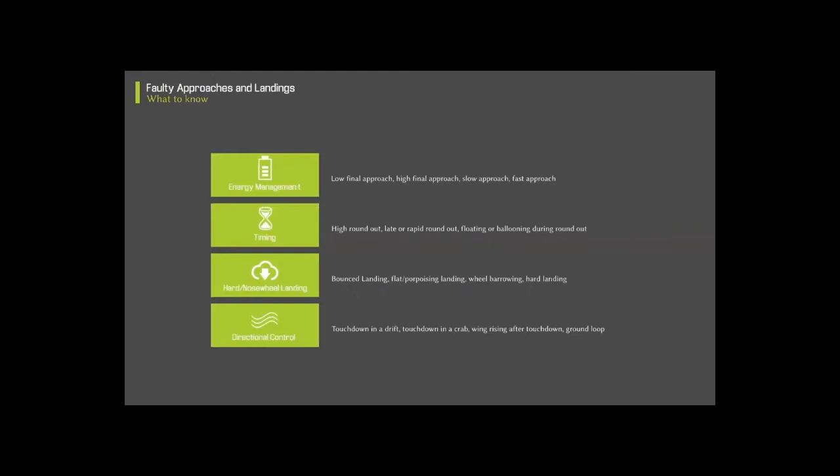The timing issues, of course, we can see high round outs, low or late/rapid round outs, floating and or ballooning during a round out. In the hard landing and nosewheel section, we've got bounce landings.

We've got issues with landing flat that can lead possibly to a porpoising landing. We also have some possibilities with wheelbarrowing, and just generally what a hard landing concern has in relationship to us, specifically when it comes to the condition of the airplane.

Directional control issues, touchdown in a drift. This usually occurs with a crosswind, though it doesn't have to. We sometimes accidentally begin to drift due to our aileron control inputs while attempting to round the airplane out or flare it into a touchdown attitude. We also have issues with touching down in a crab, where the alignment of the airplane is not correlated with the runway, so the airplane is misaligned when we touch down.

Other crosswind concerns: wing rising after touchdown. And if we have time, we'll discuss the ground loop shortly, though we won't spend too much time on it other than discussing what it is, as ground loops aren't too common in tricycle landing gear airplanes. For any of you flying tail dragger or conventional gear airplanes, as opposed to tricycle, ground loops become a bit more of a concern.

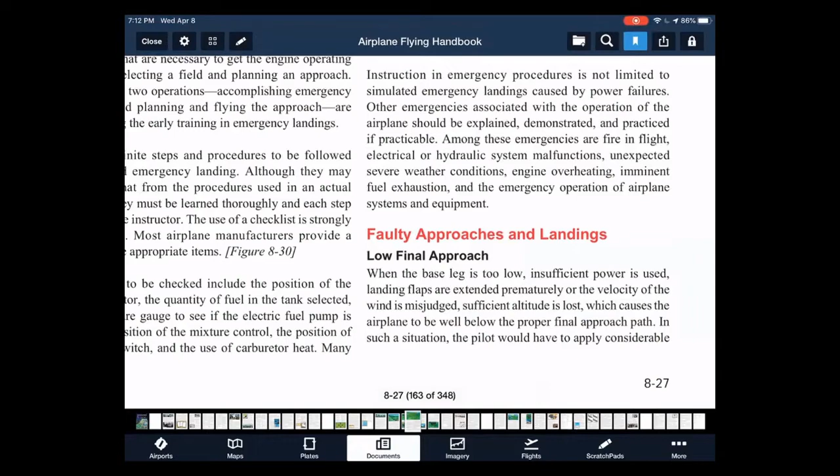So starting off in faulty approaches and landings, in this case, low final approach. If you're unfamiliar, this is the Airplane Flying Handbook, it looks like this. You can find this if you use ForeFlight, you can download it directly. And specifically, if you wanted to find where we're looking today, head to the table of contents. Let's jump to the table of contents real quick. We're looking in Chapter 8 right now, approaches and landings, specifically 8-27. So we'll jump ahead to 8-27.

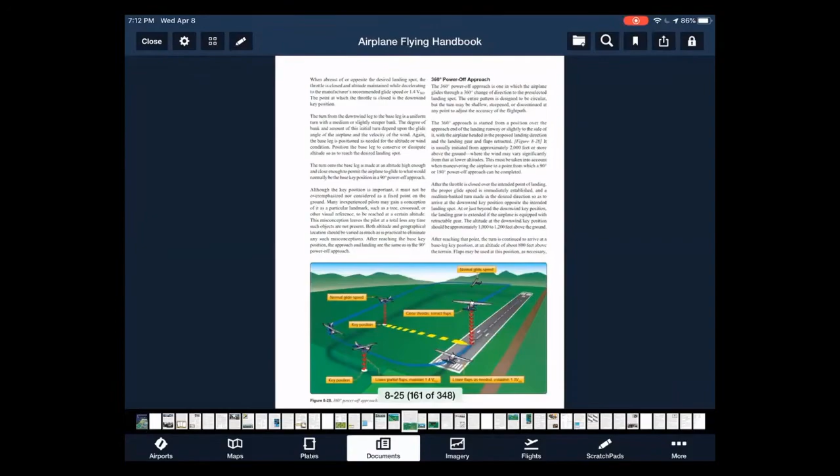And we're talking about a low final approach. Now, we're not going to read this together specifically; this is where you'd find the information, but let's just touch base on a couple of things that can complicate our approach and lead to a low final. One of the most common things I see, specifically on progress checks, that lead to low final approaches is a lack of awareness of where the winds are. Namely, usually the winds are fighting us on a base leg position, and in combination with that, usually the downwind was too wide in the first place.

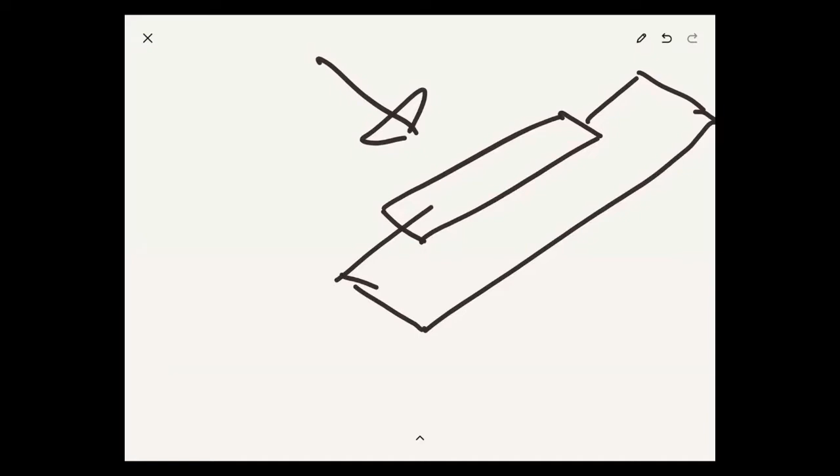So let me draw something out just to clarify or visualize what I'm saying here. Imagine this is our runway, this is kind of a semi-3D drawing here. So there's the departure leg, the crosswind, the downwind leg, the base, and the final. The problem is today the winds are blowing out of this direction. We probably in this case are not mindful of that if we're allowing ourselves to get wide on the downwind. So there's our first problem: maybe we turn crosswind too late to downwind, or we didn't apply proper wind correction angle on the downwind.

These two combining factors lead to a longer base leg to fly, and on top of that, our base leg ground speed is going to be slower. So what does that mean to us? It means that if we use the same configuration we always do, our descent angle is going to be steeper, and we're going to end up lower on this approach.

This is one of the main reasons I constantly see low approach angles, specifically on progress checks: a lack of awareness of the wind. And in reality, the wind is never the same, today is not the same as tomorrow. The more mindful you are of the wind, asking yourself where's the wind and how is it going to affect me, and what do I need to do preemptively to correct for this wind so I don't end up getting into these situations.

So low final approach is really what we're talking about. This is one of the ways to avoid being low on approach.

Another complicating factor lately is having to extend our downwind. If we take the standard operating procedures given to us by the school and apply them at various distances from the runway, sticking hard and fast to those numbers, it's not always going to work out. We have to be willing to adapt and say, this is going to be a much longer flight path than my normal position from desired touchdown point to touchdown itself. So I may start with these numbers, but I'm expecting to have to modify from them.

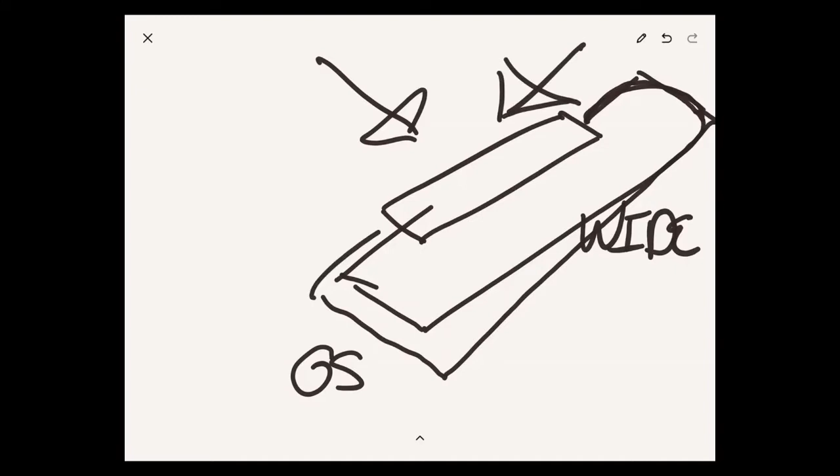This can be further complicated by different situations, like if the wind is down the runway as we hope, you may expect to be on glide on the base, but when you turn final, you suddenly turn into the wind and your ground speed slows, and so your descent angle steepens, i.e. we get low on final approach.

Whatever the different reasons, and there are more than what I've just discussed, we end up being low on final approach. Most people can recognize this, so I won't go too much into detail on how to recognize it. The key takeaway is at what point have we determined that this is unsatisfactory as far as being a stabilized approach, and need to abort the approach and go around and try again.

We know from the standard operating procedures that it's 300 feet AGL, but that doesn't necessarily mean you have to wait till 300 feet AGL to go around. Let's acknowledge that the go around is always an option, and in fact should be your first option unless you meet whatever desired satisfactory elements you need. Your mindset should be go around, go around, go around, unless at 300 feet I have A through G level parameters - you're on speed, you're on glide, you're aligned with the runway with minimal correction needed. Otherwise, it's a go around.

So we're low on final approach. The one thing I want to emphasize, because we could discuss this for hours, is an excessive commitment that I also see when people are low on final approach.

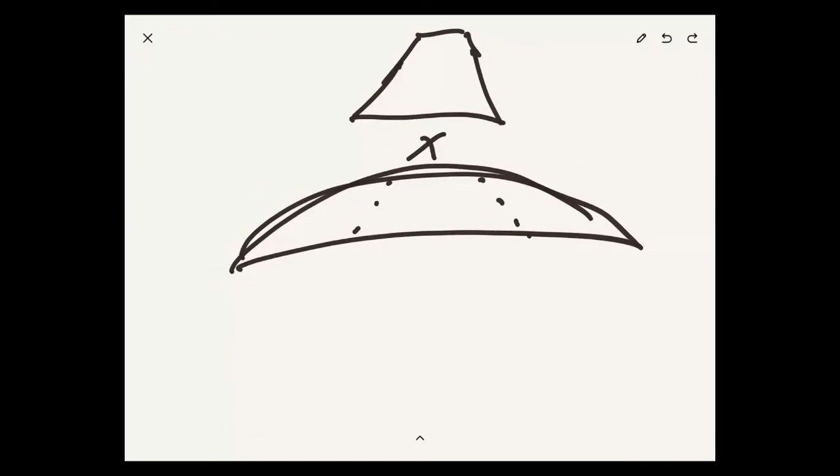Let's draw this out. Most people recognize they're getting low on final approach. Just a quick illustration to visualize what we're talking about. Most people can recognize that as they look out the window, down their sight picture, using hopefully their aim point. Let's say they pick their aim point wherever it is - maybe on a very short runway, our aim point is actually in the grass because our touchdown point is going to be here. So we're looking at our aim point, and we recognize we're getting low on approach because we see the aim point moving vertically higher in our windscreen.

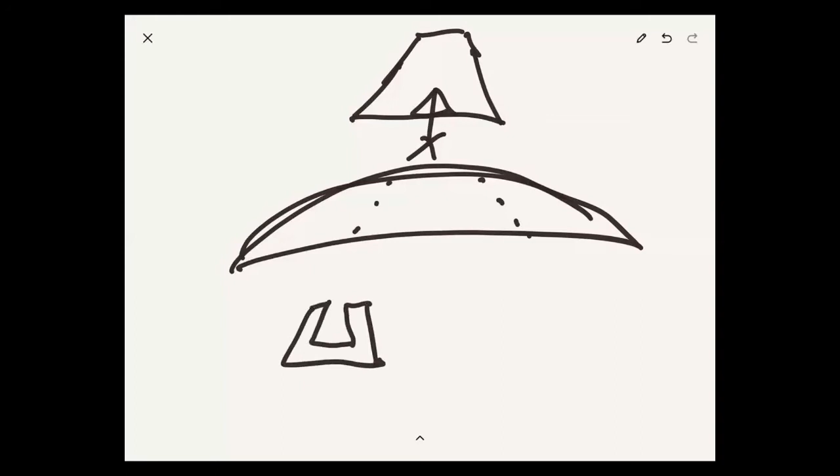Most people recognize that, and the corrective action, of course, is to add power. The problem is people recognize this, but more habitually than cognitively. What do I mean by that? I mean they react to it without recognizing they're reacting to it. Instead of the power being adjusted, it's usually the pitch that's being adjusted instead. So without even recognizing it, they're beginning to apply back pressure.

This can be further complicated by the fact that maybe there's buildings or trees that are moving higher in our peripheral, and therefore we don't like that, right? When we're flying, we don't want to see things on the ground close to us when they're not supposed to be close to us. And so those things further aggravate this habitual response to pull back on the flight controls, rather than the appropriate correction, which is to add power.

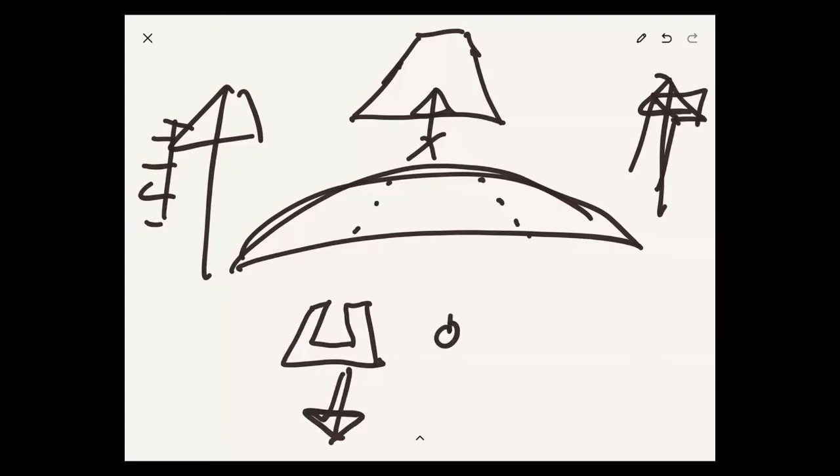Now, at a certain point, you get too slow, you have to abandon the approach. Generally that tolerance, if we think about the ACS, if we're talking about a normal approach, would be somewhere around 5 knots. It depends on the exact approach airspeed you're using. But if we're just talking about a normal approach and landing, thinking about 5 knots should really be your tolerance before you say, oh, this is a go-around.

However, even slowing down 5 knots further complicates this situation, because if we go back to aerodynamics, remember what have we really done by pulling back on the flight controls? We've increased our angle of attack. And by increasing angle of attack, yes, we produced some more lift, but what we've really done is increase the induced drag on the airplane.

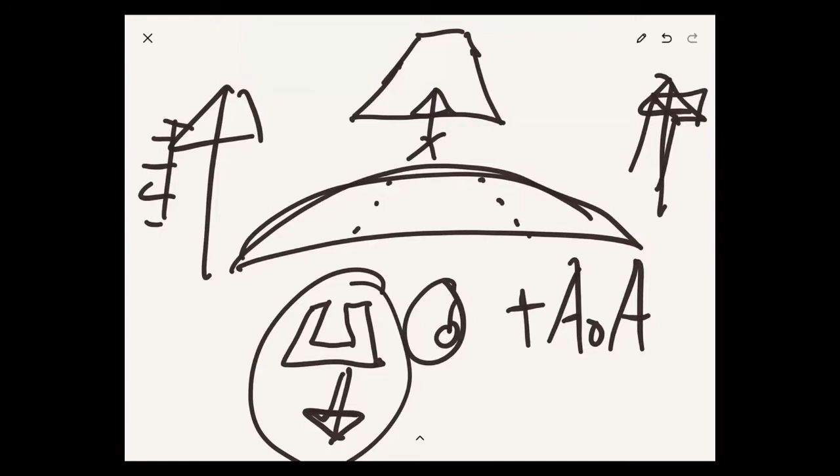So the very thing you're trying to avoid, not getting low on approach, is in fact the very thing that's going to ensure you get low on approach, because the increased drag will increase your descent angle. And so the power you needed just a moment ago to correct and arrest the descent angle and stay on the desired descent angle, not only do you need to increase it to that amount, you're going to have to further increase it to compensate for that increased induced drag.

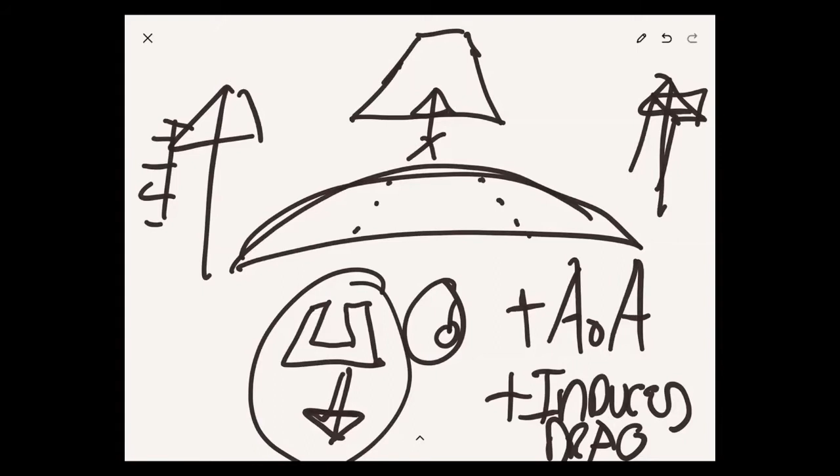So what's the takeaway from this? You've got to be cognitive of this and say to yourself, I know that, like most human beings, my habitual response is going to pull back. But instead, constantly ask yourself, is my aim point moving higher on my windscreen? If it is, and I'm on speed, then the corrective action should be to immediately correct with power.

All right, so let's talk about the secondary complication with this. Most people, if they do add power, or if we're talking about being high on final approach, will reduce power. But bear in mind that correction is just that - it's an initial correction, not your ultimate and final correction. And if you've ever asked yourself why we keep our hands on our power, it's not just because it looks cool, because that's the official pilot body position. There, of course, is a rhyme and reason behind that.

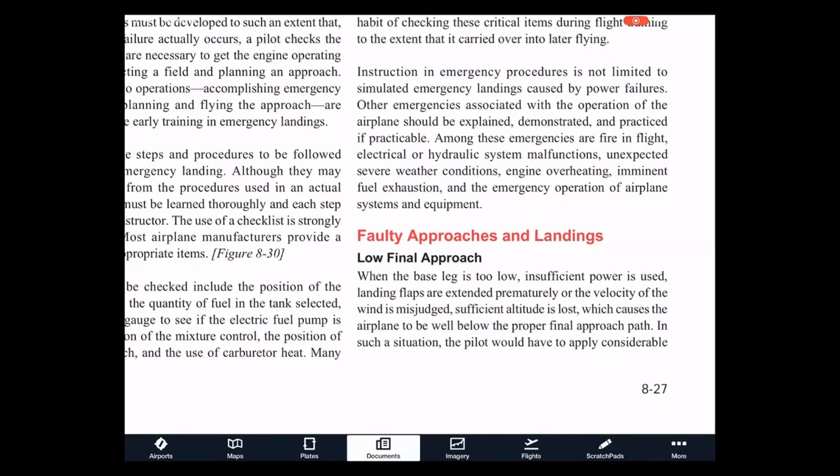Namely, in this case, we really want to think about power as much of a correction tool as the flight control itself. So we add power in association, but at the same time, we don't expect to leave the power where it is.

Here's what I also see. I see on progress checks, when someone recognizes they're getting low, they add power - good. But they don't recorrect, and that's the key takeaway. One power setting isn't the final power setting. Think about adjusting your power in and out almost as much as you would move the flight controls themselves with both aileron and elevator control inputs.

You're not committed to one power setting. You add a power setting, expecting in this case that it's going to allow you to rejoin the desired glide angle, and then you expect in association, you're going to have to reduce the power again.

If you commit to a single power setting, you'll probably fly through your desired glide angle and then find yourself on a high approach as opposed to a low approach.

So, key takeaways: think about adjusting the power continuously as necessary. In fact, if you're first learning how to land, or first learning how to make an approach, don't feel like you've got to get it right. Allow yourself to experiment, because what happens a lot of times is you're so concerned about finding that right power setting that you'll set a power setting and that's it.

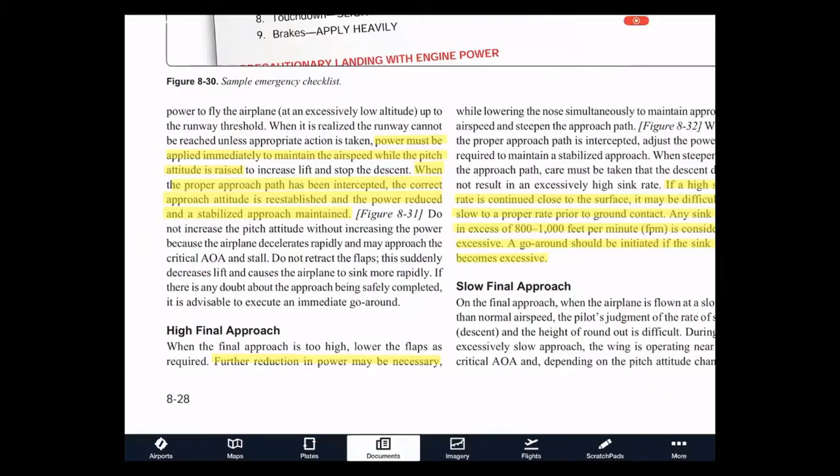And the next thing I want to talk about is high final approaches. We're not going to spend as much time as low because this is the same exact concept, but now in reverse. This is another common issue I see on progress checks: someone recognizes that they're high. In contrast to what we just discussed, now someone recognizes the aim point is moving lower in their windscreen as they're on speed, and so in association, they will reduce power.

Again, don't feel committed to that power reduction. In fact, expect to reapply the power. We even see this in the Airplane Flying Handbook. So if I jump back to the Airplane Flying Handbook, you're also going to see that they give us a specific visualization.

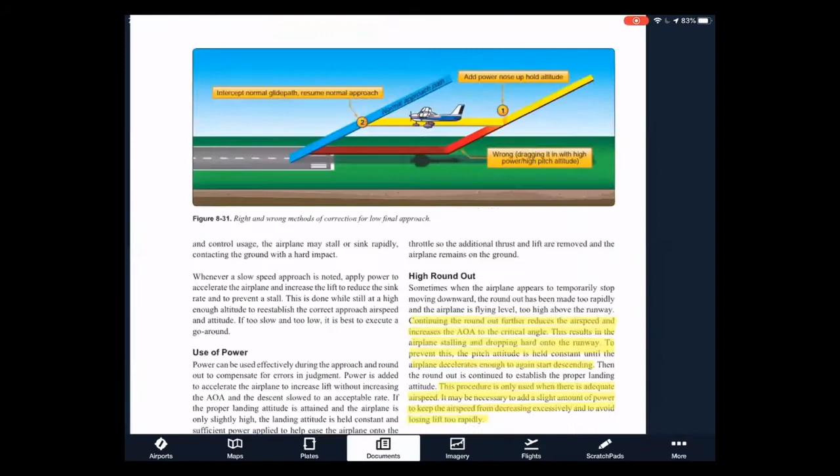In this case, to show that we are going to reduce power, rejoin the desired glide angle. I'm sorry, excuse me, this one's an addition of power to rejoin the desired glide angle, and reduce the power.

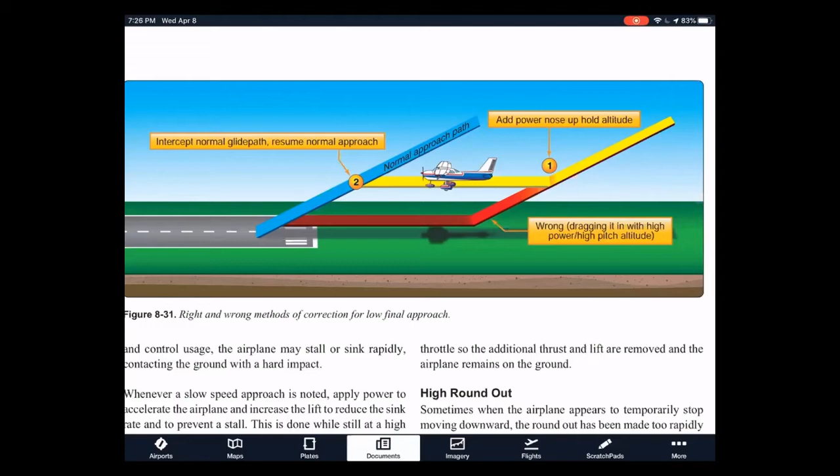There's no difference when you're high. If you're high, you've got to reduce the power to rejoin the desired glide angle, but don't expect that power reduction will be sufficient. In this case, the power reduction, if you leave it where it's at, is going to actually descend through the desired glide angle as opposed to keeping you on glide angle. So once again, don't feel like the power setting is a singular commitment. Be ready to readjust the power after making that initial adjustment.

Okay, before we go on, I want to talk about one key takeaway. Once again, with final approaches, guess what, the go-around is always an option. But one thing you need to be aware of, of course, is what's considered a stabilized approach. So if you're high on final and you reduce the power and suddenly you recognize that from your current descent you can make your aim point with the power reduction...

Sorry, everybody. Vivian had to make her appearance.

Whether or not that is stabilized really depends on whether it's an excessive sink rate. If a high sink rate is continued close to the surface, it may be difficult to slow to a proper rate prior to contact with the ground. Any sink rate, according to the FAA, in excess of 800 to 1,000 feet per minute is considered excessive. Now, does that mean you need to look at the vertical speed indicator to determine whether you're at an excessive descent rate and therefore on a destabilized approach? I'm not going to say yes or no to that. What I would say is with experience, you will develop a kind of sixth sense as to whether it's appropriate or not, because if you've done enough correct approaches with input from your instructor, from discussions with your instructor or other people, you will develop a sense for that.

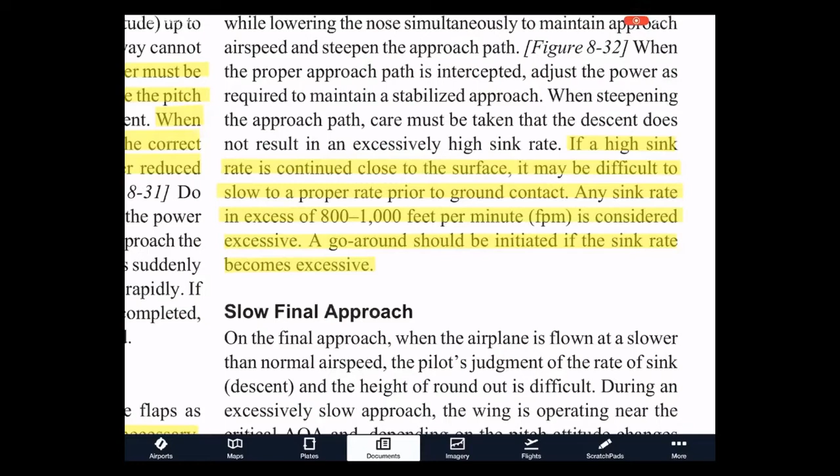The next thing I want to talk about is the slow final approach. This on its own usually isn't common. In other words, usually you're not slow and on glide. Usually the slow final approach is a result of a low final approach.

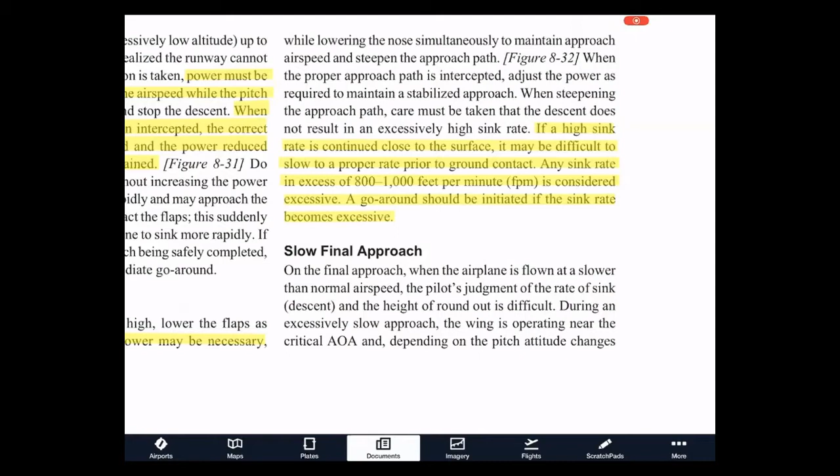It's exactly the same reasoning we just talked about when we're low on final approach, in a situation where we're raising the pitch habitually in response to the runway being higher and higher, or specifically our aim point moving higher and higher in our point of view. So the habitual response is to raise the pitch before adding power. That increases our induced drag, and that's what's going to slow us down. So usually, a slow final approach is correlated with a low final approach.

The complicating factor in this situation is, even if you can rejoin the desired glide angle, which is questionable whether you'll be able to do, and by the way, we're well below 300 feet, so we should have gone around by now in this visualization. But the idea is, if we're dragging the airplane in, the airplane's energy is entirely dependent on the power.

What do I mean by that? It means that at any point in time if you reduce the power, the airplane's response will be to sink rapidly towards the ground, or in other words, descend quickly through our desired descent angle.

So what you end up having to do is carry power long into the approach, as opposed to if you're on glide or even slightly above glide, which allows you more altitude to reduce the power earlier in the approach. In this type of situation, if you drag it in, you have to carry power pretty much right into the round out.

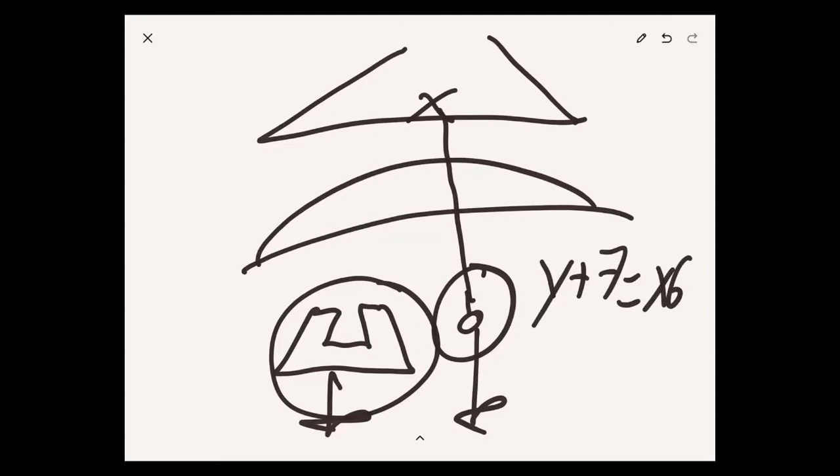If you're carrying power late into the equation, it's kind of like solving a two-variable equation. Obviously, I didn't give you enough information there, but the idea is this is your flight control, this is your power. If you compare that to a single equation, well, obviously that's a lot easier.

So what am I getting at here? I'm getting at that if you leave power late into the round out, or late into the approach, or even worse, into the flare, and you suddenly reduce the power, it's much more difficult to adjust on the flight controls in response to that.

That's the complicating factor, among many other things, that a low and slow final approach complicates. But specifically, one of the things I often see is the low, slow final approach requires someone to carry power late into the approach, and when they reduce the power, it's very difficult to manage the round out and the flare. It takes more deftness of control, and ultimately more experience to develop that ability.

So why even test that? Just use a normal approach, make things easier for yourself. The key takeaway with the slow final approach is the very difficulty of lowering the pitch.

You must reduce the angle of attack, because not only in a slow final approach do we have the complication of getting lower, since we increase the induced drag on the airplane, but as we can see in the Airplane Flying Handbook, the wing is operating near the critical angle of attack. So obviously we have a concern in relation to stalls.

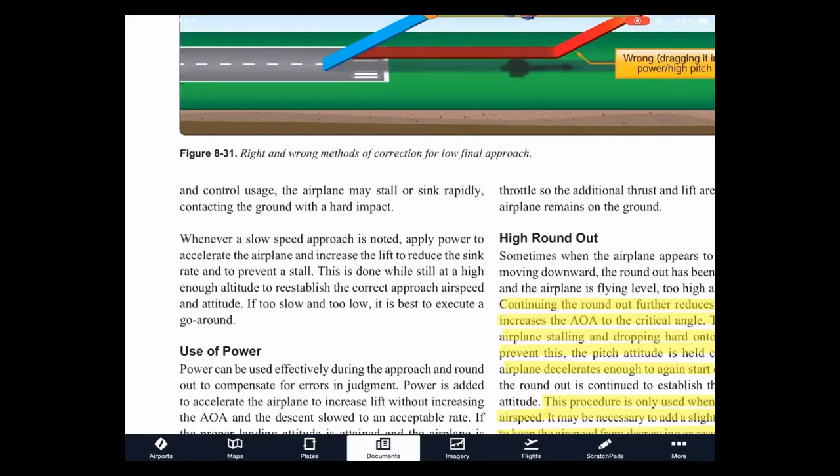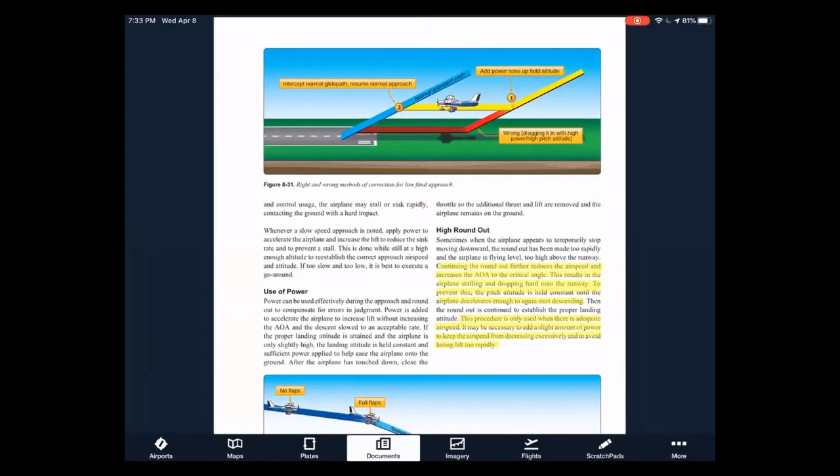All right, so let's jump ahead to our next section. We're moving past energy management into round outs. Specifically, though, let's talk about them before I present them all together.

Ultimately what we're talking about here is timing issues. In this case, timing and sight picture are key for proper timing. But as I often try to emphasize, it's a mental procedure - in other words, when are you going to look, where, when are you normally reducing the power, and then ultimately touch. Touch, admittedly, does come with practice, but it also comes with proper procedure.

As everyone who flies with us knows, we should have the airplane properly trimmed - namely, as the SOP states, at least 2 to 3 wheels of trim, so that the flight control is light in your hand. You can't have good touch on the flight controls if you're constantly fighting the airplane. So a relaxed grip is really key in this consideration.

By utilizing some of those procedures we'll discuss specifically, for most people we eventually get the approaches down. We can recognize when we've destabilized the approach and we just go around - that's a solution. But now we're getting closer to the ground, things get a little more complicated, requiring a bit more deftness of control. There's less standard operating procedure for it, because when you're close to the ground, it's more of a feel than a procedure. That's not entirely true across the board, as we'll discuss, but touch is a key element.

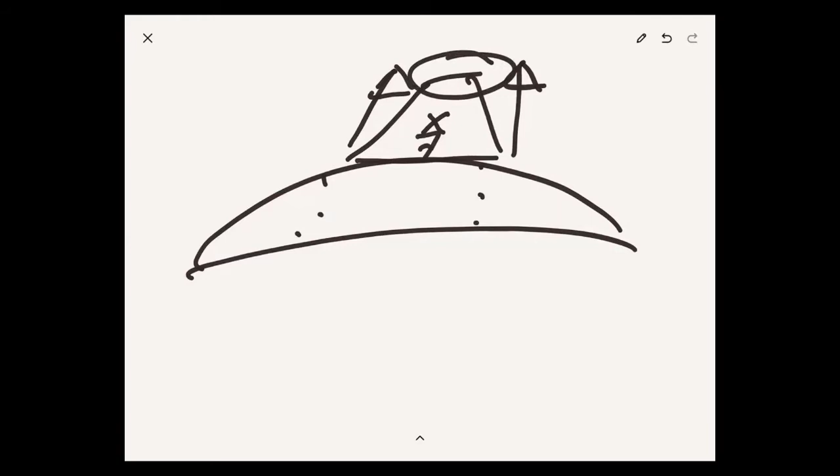This is the complication that leads to a high round out, where we stare in over our nose still at our aim point, or our touchdown point beyond it. So when do we reduce our scan at the aim point and move it toward the end of the runway for proper depth? It's when you begin to reduce the power, and you reduce the power when you recognize the aim point is made. So you're done with the aim point at that point. You begin to close the throttle back, recognize you have the aim point made, and your eyes are drawn out towards the end of the runway, which begins to give you depth perception as you move closer.

Don't forget also, secondarily, another way to interpret your depth is that as you move closer, the runway itself begins to envelop your peripheral. So you're looking out there, but in your periphery you can still see the runway moving sideways around you as you get lower to the ground. Those are your two key takeaways: scan towards the end of the runway for proper depth, but also use your peripheral vision to recognize when the runway envelops your peripheral, at least the width of the nose—that's the time to begin the round out.

If all the while you've been staring at your aim point instead, it's going to fool you into thinking you're closer to the runway than you actually are. This is usually the most common culprit for why a high round out occurs.

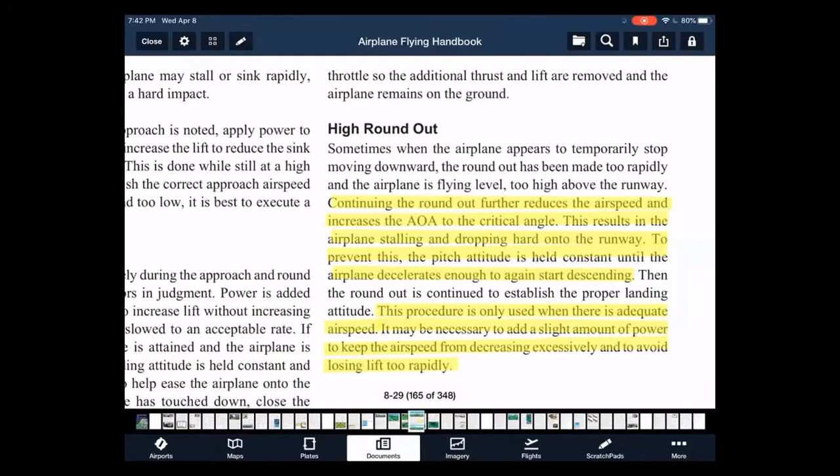And early on when you're first learning landings, there's not a lot of room for judgment. So it's best that you first consider the go-around. Again, that's our first option. And avoid, of course, a stall too high above the runway.

Once again, the book says it is recommended that a go-around be executed anytime it appears the nose must be lowered significantly or that the landing is in any other way uncertain. So your go-around, as you can see, is always your first option. And guess what? It's going to be the first option for all of these complications.

All right, we've got some polls in here. Nobody fell for my last answer there. So yes, it looks like a few people are still concerned about the difference between the round out and the flare, understanding the difference between the round out and the flare. And the second element would be the confusion between the whole aim point and touchdown point thing. So we are definitely going to address both of those. And I think actually this is a good time to do it.

So let's stop for a moment. I'm actually going to open it up for questions after I kind of delve into this, and then we'll move on. So before we do, let me draw out a couple of things.

Okay, the first thing is, what in the world is the difference between the round out compared to the flare. Because a lot of people say the round out and the flare, right? And yes, if it's done properly, they do move fluidly together where one just transitions smoothly into the other, where you almost, as an observer, couldn't tell the difference. But for those who are first learning, you do really want to separate them.

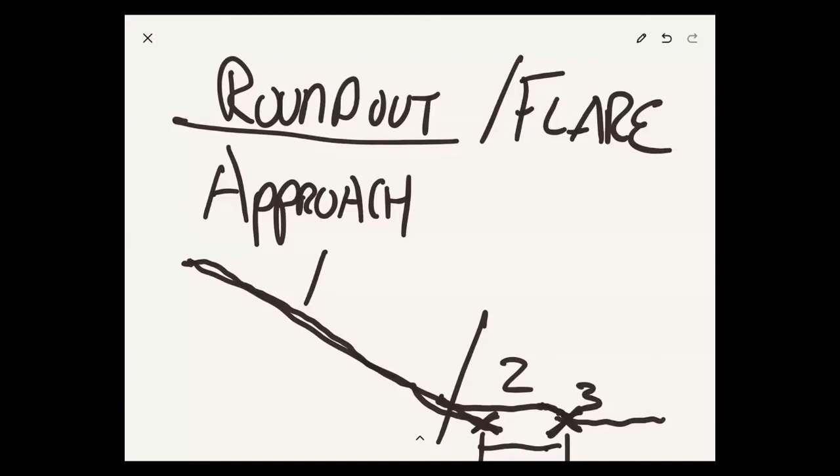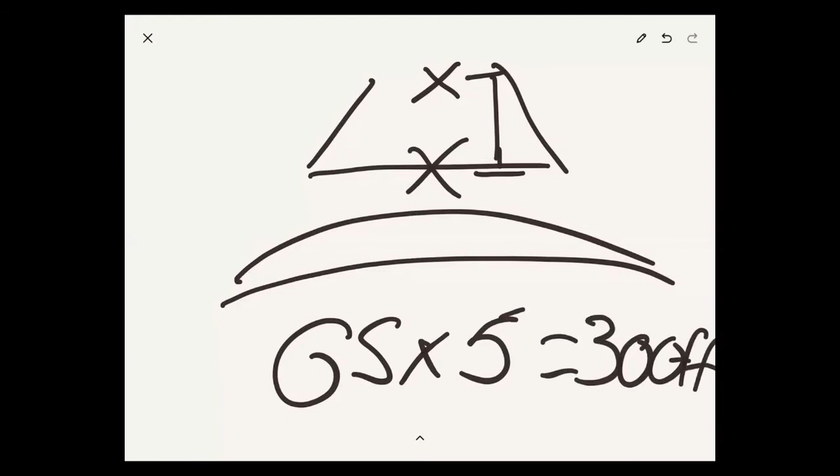So what that looks like to us out the window: if I want to land here, I can't aim there. In other words, that point should not stay affixed in my windshield—I have to aim somewhere short of it. The difference between the two depends on the airplane and configuration you're flying. But if you're flying a Cessna 172 with full flaps at normal approach airspeed, the rule of thumb is generally ground speed times 5 in feet. So if your ground speed is 60, it's approximately 300 feet difference between where you should aim and where you should touch down.

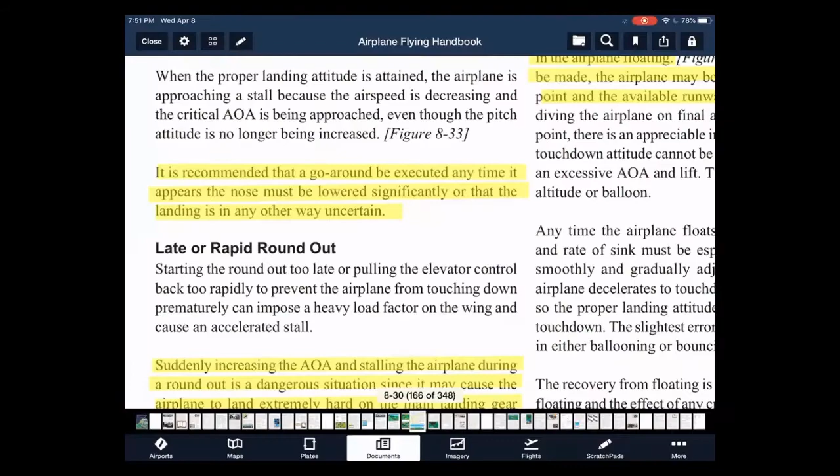So with that being said, now that we've differentiated the difference between a round out and a flare, we've talked about the high round out. Key takeaway again: when your aim point is made, move your eyes out towards the end of the runway and associate the timing of that movement, usually with your initial reduction of power, to begin focusing on depth perception.

As we talked about before with a crosswind, you can't stare only at the end of the runway. You've got to look back and over the nose to make sure the nose gives you signs that you're properly aligned. But when you're thinking about depth, your eyes are kind of moving back and forth between the nose and out towards the end of the runway for depth perception.

What about a late or rapid round out? As we talked about before, if you're on a steep descent angle, in other words in this case on a high approach, you could be experiencing such an excessive descent rate that it's very difficult to time the round out, and this leads to a late rapid round out.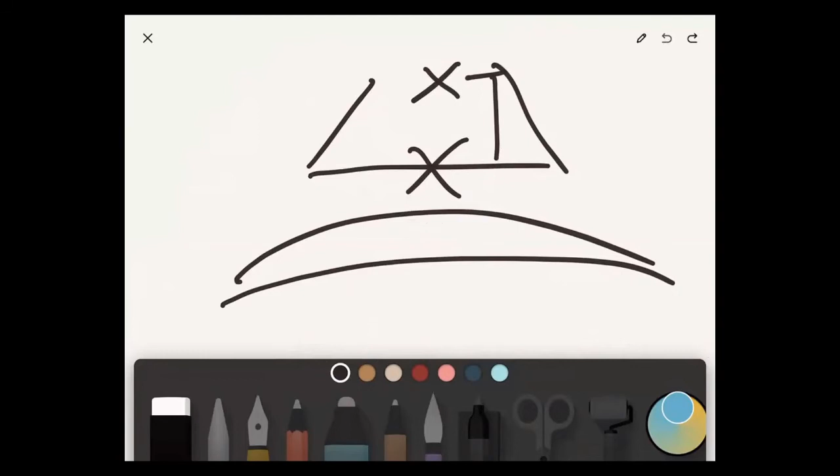So what do we really mean by a late rapid round out? Most of you have probably seen this before. You're maybe distracted with the crosswind, or the descent rate is suddenly increased because of a shift in the wind, or whatever combination of events, and suddenly you recognize, wow, I'm way closer to the runway than I initially thought I was. And it looks like we're careening towards the ground. And if we don't do something immediately, the nose wheel is going to hit the ground first. And so we pull back to arrest the descent.

This is kind of the most extreme example, and this could certainly occur with an excessive descent rate. But as we'll talk about, it often commonly occurs because of what we just talked about before, where people are mentally skipping the round out.

So what to do in this situation? Well, if it's an excessive descent rate and you nearly hit the ground nose wheel first, then the best solution, of course, is a go-around. A common saying that I like to use is landings were not meant to be saved. So we're already outside of what we expect to want to see. We want to see a normal approach, a normal round out, a normal flare. Anytime we deviate from that, our corrective action, our first go-to action is a go-around.

That being said, let's say it's just slightly late. Namely, in this case, let's say it's because we forgot to think about the round out. We were focused maybe on our aim point, thinking about the crosswind, and we just suddenly realized, wow, I didn't focus on my depth perception when I began to reduce my power. And so I wasn't scanning the correct location, and suddenly I realized I've rounded out later than I should have.

What's the big deal about a late round out if I'm just closer to the ground than I should be? There's a couple of complications. The first of which is you're going to be fast, too fast, too close to the ground. So if you visualize this, the airplane has very, very little distance between the runway and the wheels themselves, and you've got a lot of airspeed, or a lot of energy to dissipate, with no altitude to compensate for.

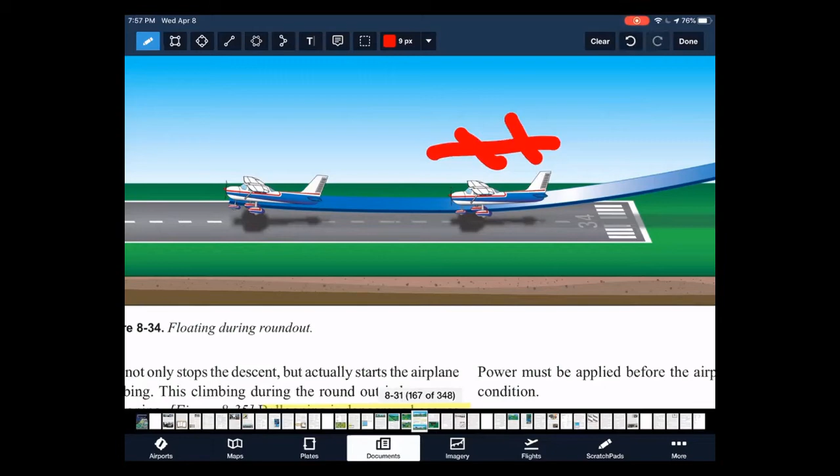Well, if the airplane is situated here - that's an exaggeration, but stay with me - then from that rounded out position, as the airplane continues to vertically descend and loses energy, you'll see that occurring as you look down. You've got the ability to respond, because the vertical movement of the runway is in fact your cue point to tell you that you need to continue rotating the attitude to a flared touchdown. That extra 3 to 5 feet gives you the ability to recognize that. You don't have to have a crystal ball anymore. You can respond to what the descent of the airplane is telling you. As it vertically moves downwards, you recognize that as your reference point. As you look down, the runway is moving up towards you, and you respond by rotating the attitude into a flared attitude for touchdown. That is your tool.

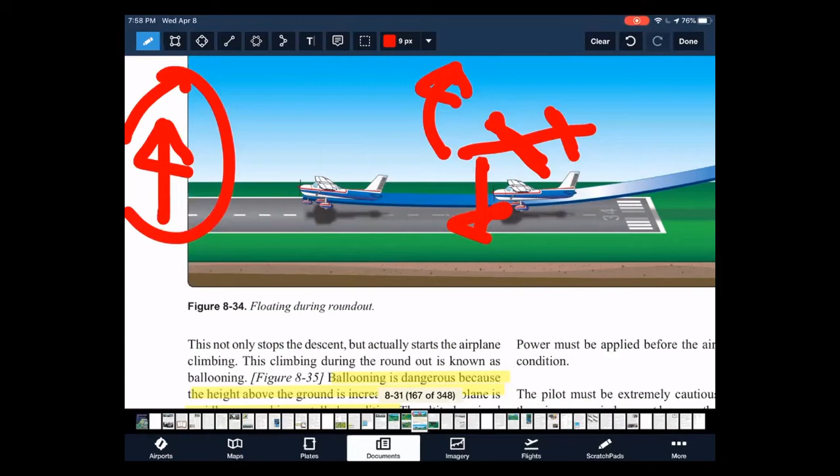In the same way that I respond by lowering the pitch to level out by referencing the altimeter, this sight picture is now my instrument - my depth perception based on my view down the runway. If I'm too close to the ground, I don't have that. I'd have to know the airplane so well, with such a good deftness of touch, that I could time it habitually without even having a reference to tell me. So that's the key takeaway with rounding out too close to the ground: you don't have any tool to tell you when to rotate the attitude of the airplane.

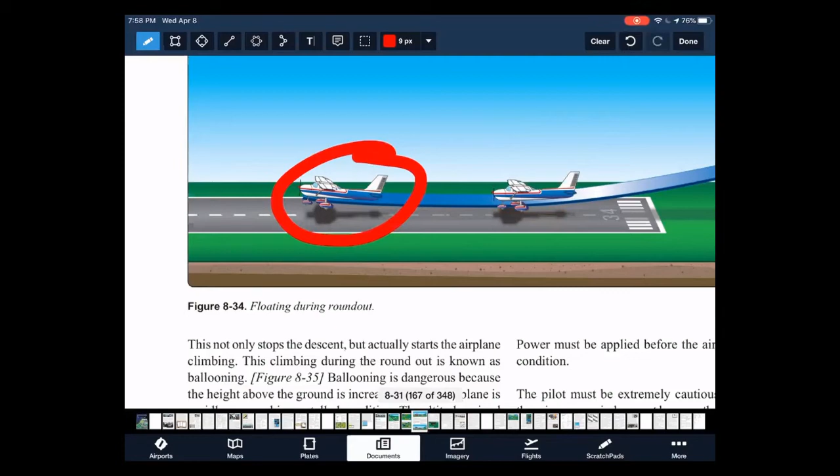And that's why low round outs usually lead to the two most common results: a flat landing or a balloon back away from the runway. Let's read what the book has to say before we go on - this is in the section about a late or rapid round out. We can see they recommend, once again, that otherwise the pilot should execute a go-around immediately.

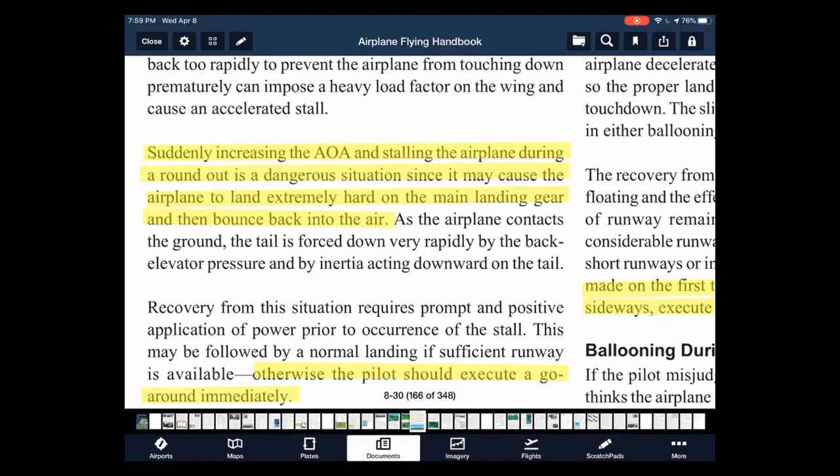But before that, suddenly increasing the angle of attack and stalling the airplane during a round out is also dangerous, as it may cause the airplane to land extremely hard on the main landing gear and then bounce back into the air. This is the most extreme example, likely caused by an excessive descent rate, or more likely by being distracted and recognizing late that you're about to impact the ground, then pulling hard back on the flight controls. Be aware that trying to arrest the descent this way may lead to an accelerated stall and a hard landing.

Certainly, if this ever occurs and you bounce back into the air, a go-around should be executed immediately. So if we haven't seen the recurring theme already: think go-arounds first as a preemptive action, and only continue when everything else meets the requirements.

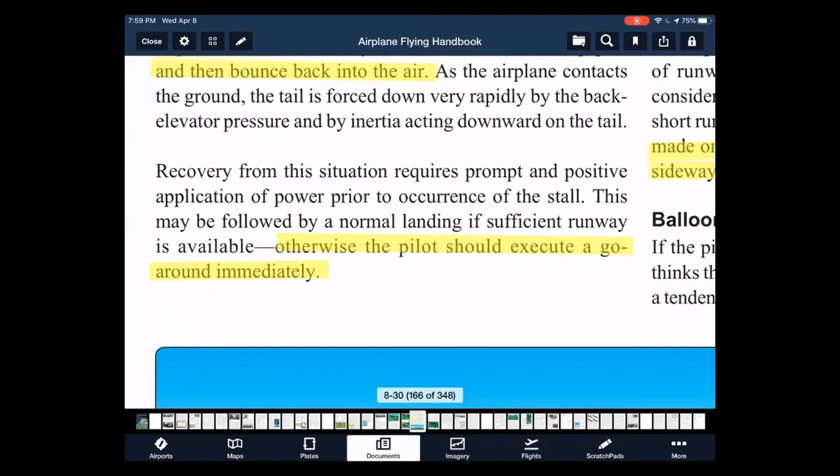Okay, let's move on to floating during round out.

So I didn't talk earlier about fast approaches. Fast approaches can create complications from an excessive lift issue, so you end up being high on approach as well. But really the biggest thing to take away from a fast approach is the complication it leads to when trying to land the airplane, i.e. you have too much energy. The airplane doesn't want to land. And so it leads to an excessive float where we land well past where we want to land on the runway, or even worse, we try to force the airplane onto the ground before it's ready to land.

So if we just read the AFH in the highlighted section, if the airspeed on final approach is excessive, it usually results in the airplane floating. Before touchdown can be made, the airplane may be well past the desired landing point and the available runway may be insufficient.

This does happen. There's actual accidents that occur. Why did that pilot land that airplane so far down the runway? Because the go-around isn't the first thought process in the mind. In fact, in many cases, it's never even considered. It wasn't taught maybe during their initial training, and it certainly wasn't practiced following that. And so it's just not part of their repertoire or their tool set, if you will, to solve problems when it comes to landings. As we just talked about, landings are not meant to be saved.

So if you're excessively fast on approach, you can expect every single time to float excessively down the runway. The only saving grace you might have is a strong headwind that reduces your ground speed and ends up allowing you to float in the air, but not necessarily move laterally across the runway excessively.

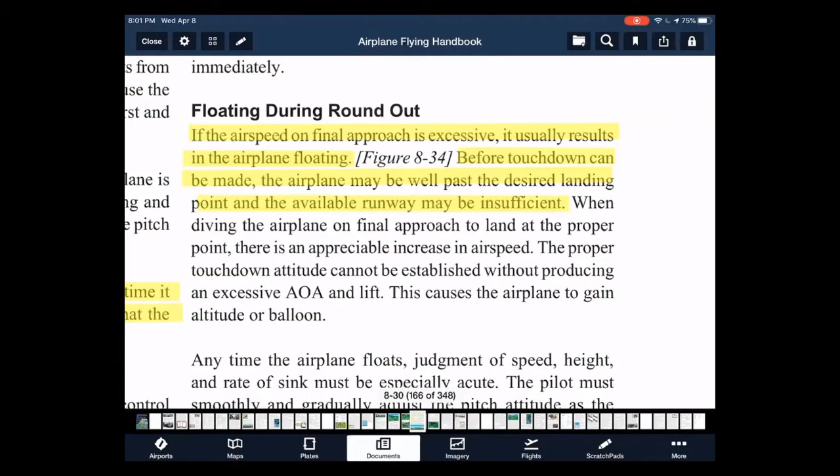Let's talk more about the bigger concern, though, and that's, of course, trying to force the airplane onto the runway. So let's just write out a couple of complications that, of course, can occur. We'll talk about them more here in a little bit. But especially with the 172, it does not like to land before it's ready to land. So if we force the airplane onto the runway, we have a lot of complicating factors. One, the landing is going to be flat.

Now, I remember when I was first training that I liked flat landings. I seemed to have the softest landings when they were flat, rather than every time I got the nose up, I'd kind of plop onto the ground as I stalled onto the ground. So despite what my instructor said, back in the recesses of my mind, I thought, you know what? I don't know what they're talking about. Flat landings seem to work for me.

So what is the big deal about a flat landing? Well, as I already said, they're going to be fast. So what does that mean just from a standpoint of longevity of brakes and tires? It means you're going to be using the brakes more, which means the tires are going to wear out faster. The brakes are going to wear out faster.

But also with flat landings, you have directional control issues. So now, because you're on all 3 points and you're going faster than you normally should, the airplane becomes less stable about its directional control. The rudder inputs become overly responsive, as opposed to when you at least reduce the weight on the nose wheel, much less have the nose wheel off the ground.

Then we get into even worse situations like wheelbarrowing, which we'll talk a little bit about later. If I didn't spell this right, I'm sorry. And then the worst of all would be a porpoise situation. I think that's how you spell porpoise. So the porpoise situation is definitely the worst case scenario, as we'll talk about a little bit later.

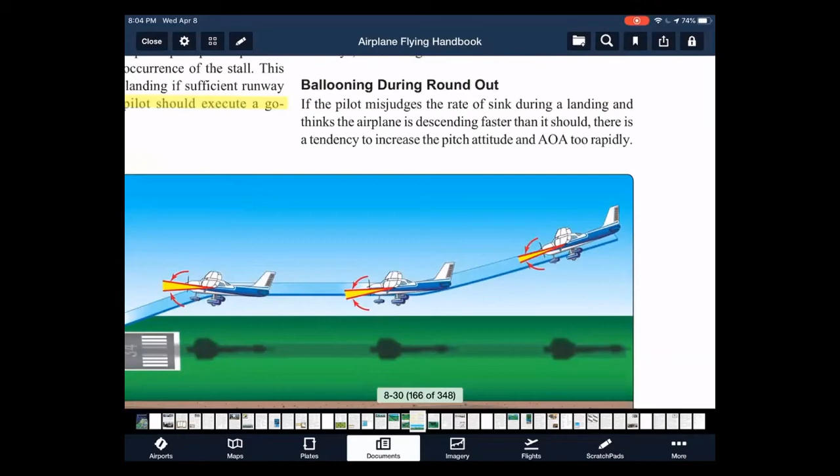All right, so ballooning. We alluded to that when we talked about a late or rapid round out. This can still occur when there's an incorrect input during the timing of the round out and or the flare.

Ballooning, even if it wasn't because of a late round out, can often occur when you're first trying to get a feel for the airplane. But it often occurs as well when people don't have the trim set properly, because you have a lot of control pressure in your hands, you're fighting the airplane, and it's very difficult to feel that deftness of control needed to get just the correct amount of control response in association with timing the round out and the flare. So you're fighting the airplane and not getting what you want, so you increase even more, and that excessive control input leads to a balloon.

Why are you ballooning specifically? If you think about it, what's really happening—anybody that hates math, bear with me—lift is equal to the coefficient of lift, which I'll explain, times air density in the atmosphere, times velocity squared, times the surface area of the wing.

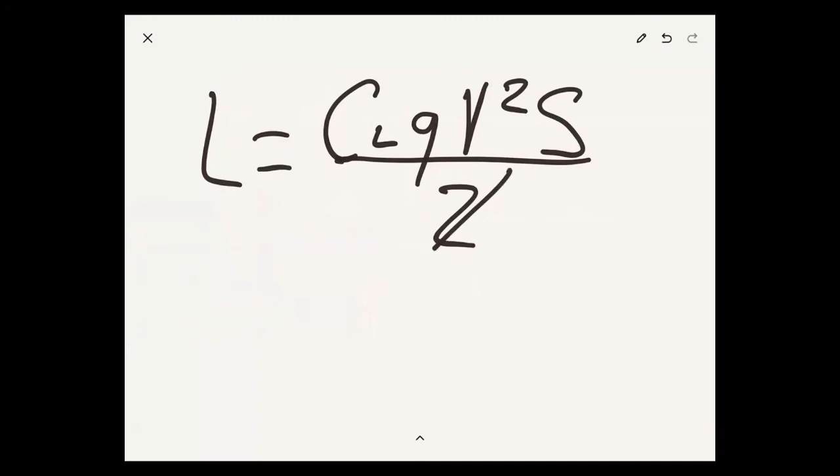When you're landing an airplane, let's get rid of the stuff we don't really care about because they're constants. Air density affects us but it's a constant we can't change in the moment. For our airplane, we can't change the surface area of the wing either. So really what we're concerned with are two things: we're either changing the coefficient of lift, or we're changing the velocity of the airplane.

When we round out, the velocity starts going down. What we want to do is, as velocity goes down, we want to slowly increase the coefficient of lift so as to control the sink rate of the airplane. So as the velocity decelerates, we increase the coefficient of lift by increasing the angle of attack. If velocity isn't going down fast enough, or we increase the coefficient of lift too quickly, we're going to balloon away from the runway. You're having to time the increase in the angle of attack, or the flare attitude, such that you can correctly compensate for the loss of velocity with an increase in coefficient of lift.

That requires a deftness of control. And so if you're fighting the airplane, thank you.

My wife brought me some water. Okay, that might help.

Sorry about that. So if we're trying to time this perfectly, any kind of extra control loading, i.e. not being properly trimmed, is going to create complications. So again, don't forget those 2 to 3 wheels of trim, at least on short final.

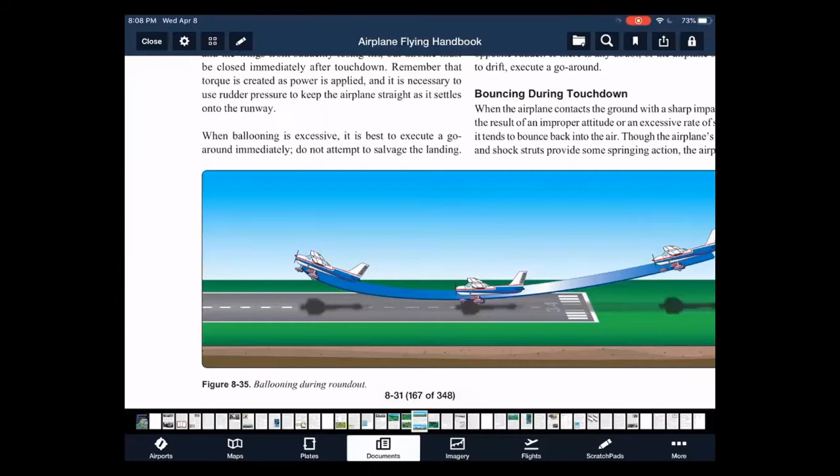What if you do balloon? What do you do? Balloons, in my opinion, are kind of no-go situations, unless you immediately recognize this and immediately respond with some relaxation. You never want to push forward on the flight controls, because a balloon can be a kind of rock and a hard place situation. Relax the back pressure, then you need to go around.

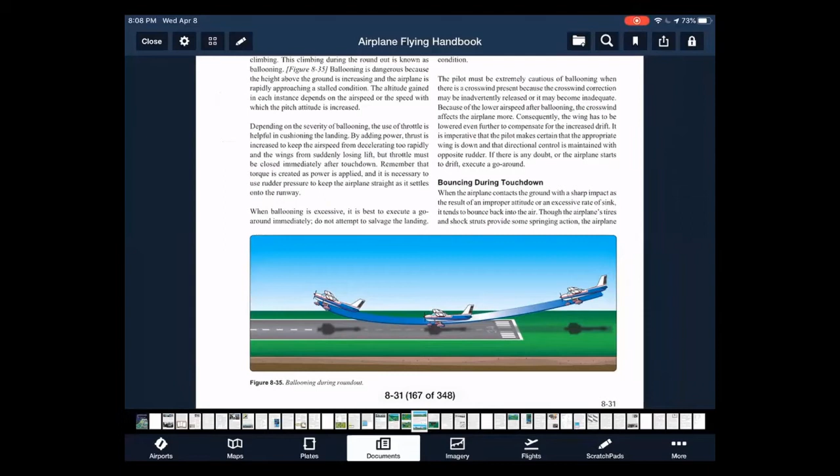With a rock and a hard place type situation like a balloon, you're moving away from the ground while also rapidly decreasing the airspeed, and in association increasing the angle of attack. So you're moving further and further away from the ground, which allows for more free fall distance, on top of the fact that you're moving closer to a stalled condition. The problem is, if you unload the wing or lower the pitch, then the very thing keeping you from rapidly sinking toward the ground—the lift you're producing from the increased angle of attack—is gone. So you can sink into the runway by reducing the angle of attack, and on top of that, you'll sink with a flat attitude because you've lowered the pitch of the airplane. So you never want to push forward on the flight controls in a ballooning situation.

So what does this really look like when this happens? It comes back to that reference point down the runway. If this is my nose and I'm looking down the runway, excuse my elementary drawings. What ends up happening in a ballooning situation is this aim point, this reference point, starts to move back down. In other words, we have a visual sensation that as the reference point moves downward in our point of view, we're ballooning away from the runway.

Let's read what the Airplane Flying Handbook guidance says about this real quick. Depending on the severity of ballooning, the use of throttle is helpful in cushioning the landing. By adding power, thrust is increased to keep the airspeed from decelerating too rapidly and the wings from suddenly losing lift. This is another reason why it's beneficial to have your hand on the power at all times, because even low to the ground, you may have a situation, even if it's not a balloon, maybe there's a sudden gust of wind where the airplane begins to sink rapidly towards the runway.

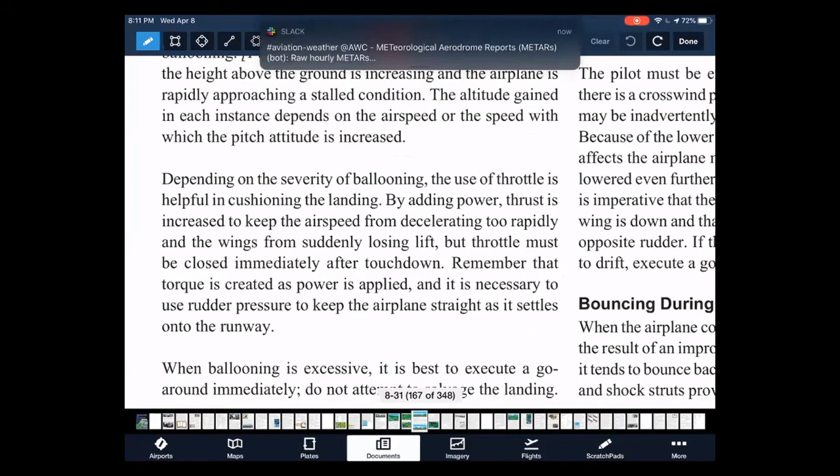You can't solve that by just saving the attitude with pitch, you've got to add some power. Their recommended corrective action, and if I'm not mistaken this is a written question, is if you were to bounce, or in this case balloon back away from the runway, you want to fight the very desire to push forward on the flight controls. Instead, you hold the attitude you have, depending on the severity of the balloon, and you add power to arrest the descent rate to allow a proper sink rate towards the runway and therefore touchdown at a rate that's not excessive.

But that in its own right takes practice. So if you haven't practiced this, and this is the first time you experience a balloon, let's say on your solo flight, you never had ballooning issues, and now suddenly you balloon because you have less weight in the airplane. You're used to a certain timing of that increase in coefficient of lift, or timing of rounding out and flaring, and you mistimed it because the airplane isn't quite ready to land due to the lower weight compared to lift, and you balloon. You haven't practiced this, so the best solution is just to go around and do it again. You've done it enough times that you're going to get it right. Don't try to solve the problem that you haven't practiced. Just go around, that's your best solution in a balloon.

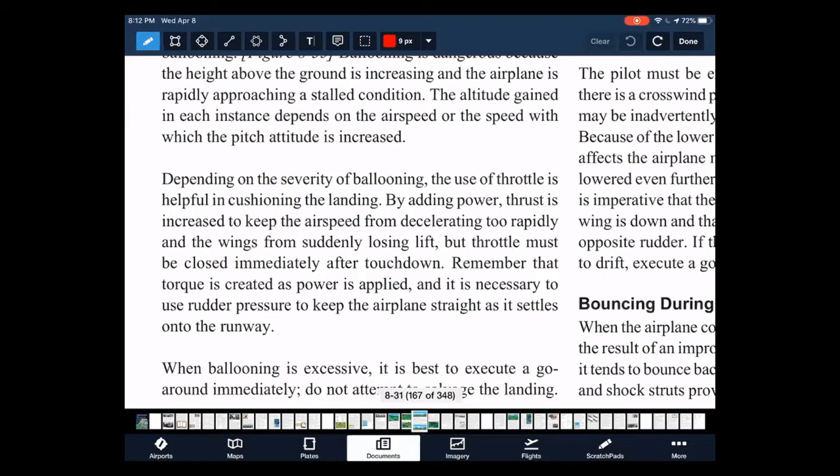Again, for me especially, this is my own personal opinion. Not every instructor would necessarily say this, but this is a point of no return for me, for someone who doesn't have a whole lot of experience when it comes to ballooning. Just go around, it's your best option.

Let's get into our hard landings and our nose wheel concerns real quick. I'm going to take a drink of water. Give me just one second here so I don't lose my voice.

As I talked about before, we can have preemptive notions about how to correct different issues. That being said, when we get into these circumstances, there's not a whole lot of ways to simulate this. We can talk about it, we can be aware of the situation, but there's not a whole lot of tools I can give you that apply across the board, except, as you guessed, a go-around. We're not going to get into specifics, since every situation has its own set of variables, and that set of variables can be truly infinite.

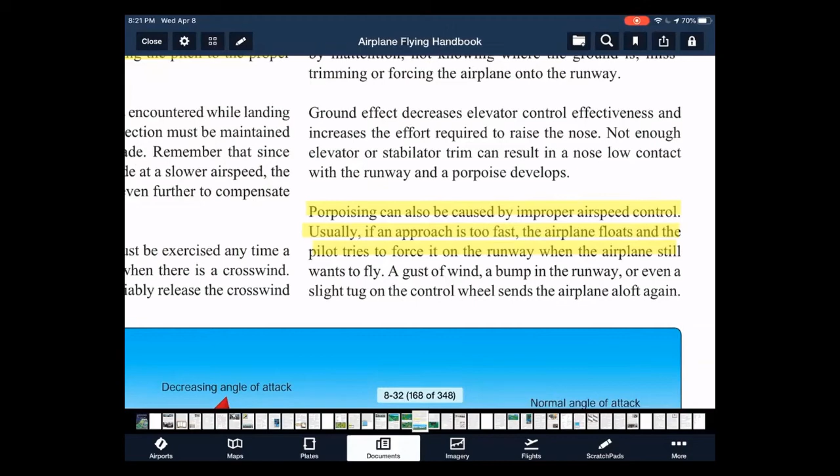The AFH says porpoising can be caused by improper airspeed control, in this case a too fast approach airspeed, and the pilot tries to force the airplane onto the runway when it's not ready to land. What ends up happening doesn't even have to be as agitated as we see here initially. It can actually be quite subtle at first and become worse and worse over time.

So let's say that we're trying to make our short field landing. We're on our check ride, and Ed's sitting next to us, and we're sweating bullets. And we're like, oh man, this is not working out, I got to make this happen, I can't fail this check ride. And we recognize that we're shooting past our aim point. Thanks, Evan. No problem.

And we start to round out over our actual touchdown point, and we're like, oh, I've only got 200 feet, I got to put this airplane down. So we touch down, maybe softly, but we touch down on all 3 points. The problem is, if you touch down on all 3 points with an excessive amount of airspeed, you have an excessive amount of lift, and the slightest increase in angle of attack can cause the airplane to balloon back away from the runway.

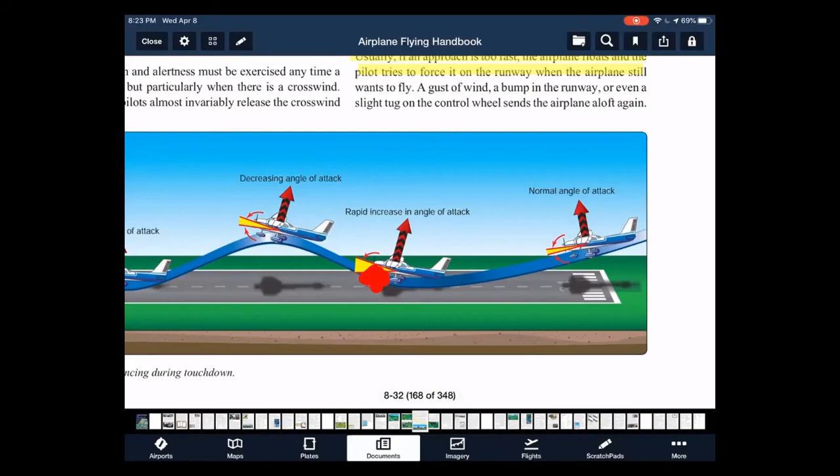But the other thing that can occur is if you touch down slightly nose first. As you hit nose first, just slightly, that causes the nose to bounce back up, which causes an increase in angle of attack, and then you hit the mains. So you come back off the ground a little the first time, then come back down and hit nose first again, except this time the oscillation's a little worse. The nose hits harder, causing a harder bounce onto the mains, which increases the angle of attack even further, and you see where this goes.

Those oscillations become more aggressive and agitated, which can lead to a multitude of issues: loss of directional control, to name the least of them, but eventually can lead to a prop strike or even a failure of the nose gear itself. As soon as you recognize you've landed flat, a go-around should already have been initiated. But if you begin to see an oscillation between the nose wheel and the mains, there's no way to stop it except to go around.

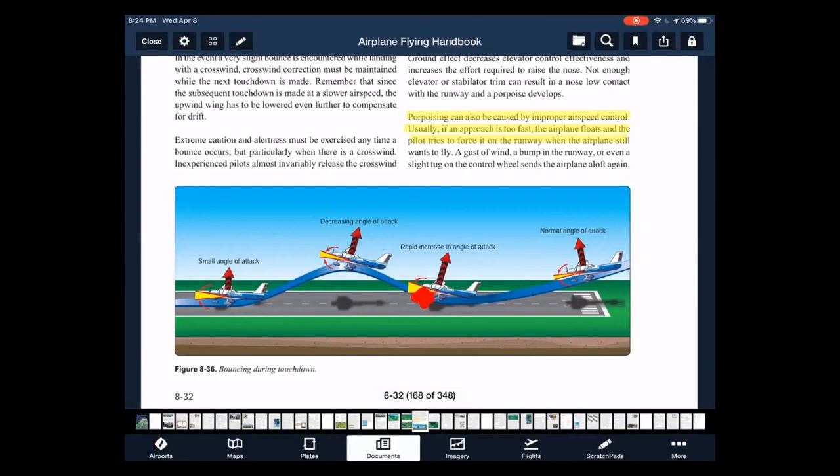Now, the AFH will also say you can raise the angle of attack, which is true, but that takes a deftness of touch that we don't need to practice for. So the easiest correction is simply to go around. Again, how do we avoid this? We avoid it by avoiding fast approaches. If we come in fast and it doesn't look right, we go around.

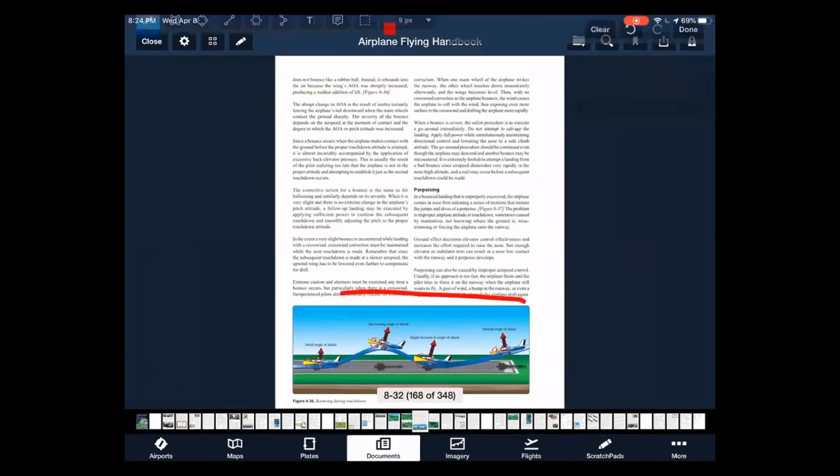I don't know why it's writing when I'm telling you not to write. Gotta love software. Please stop writing. Okay, on that note, let's see if I can close this and open this back up, and that will solve the problem. There we go.

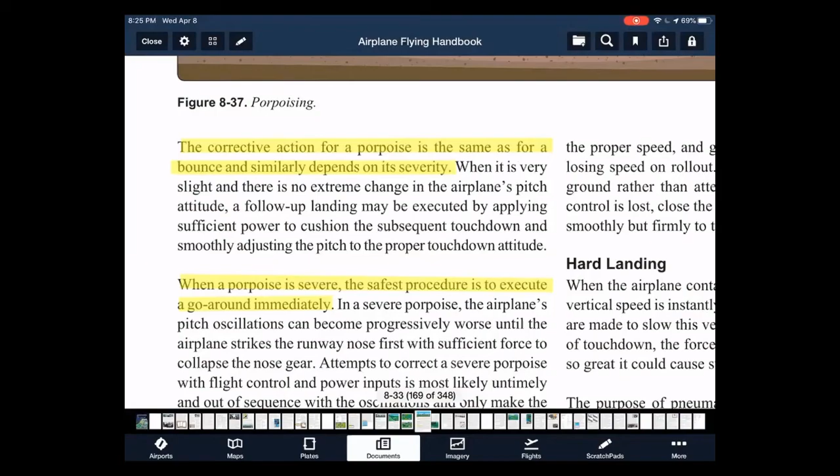Okay, so if you haven't already seen it enough, guess what? When a porpoise is severe, the safest procedure is to execute a go-around. I will say the AFH says the corrective action for a light porpoise is the same as a bounce: you hold the angle of attack by keeping the back pressure in, and add enough power to cushion the subsequent touchdown. But for us, just go around. It's so much easier and doesn't take precision of control inputs that we haven't practiced.

The other complication with a flat and fast landing is a wheelbarrow. This is a situation where the airplane literally turns into a wheelbarrow. In other words, the weight of the airplane becomes so distributed onto the nose wheel that you are on the nose wheel solely, or most of the weight is distributed to the nose wheel, which creates a multitude of complications, the biggest of which is directional control. We talked before about how it's much easier to directionally control the airplane when the weight is off the nose wheel, or especially if the nose wheel is off the ground. This is the exact opposite, the antithesis of that concept.

This usually happens in this situation: you come in fast, maybe you chose to land when you didn't feel comfortable with the circumstances, the winds were excessive, whatever the reason. You're coming in fast, you didn't manage the airspeed properly, and you land flat and fast because you're so nervous about the situation. In doing so, you give up on the back pressure, right? Because we want to relax in that situation. Oh, I'm on the ground, it's over. When we relax that back pressure even further, we can push all the way forward on the flight controls with this specific type of airplane, and that distributes the weight onto the nose wheel.

In this situation, it can turn into a wheelbarrow, and at that point, you're literally pivoting on the nose wheel. Imagine the directional response of the airplane in that situation. The slightest control input could lead to an excessive response and make it very difficult to control the airplane, especially as we see in the AFH in crosswind conditions.

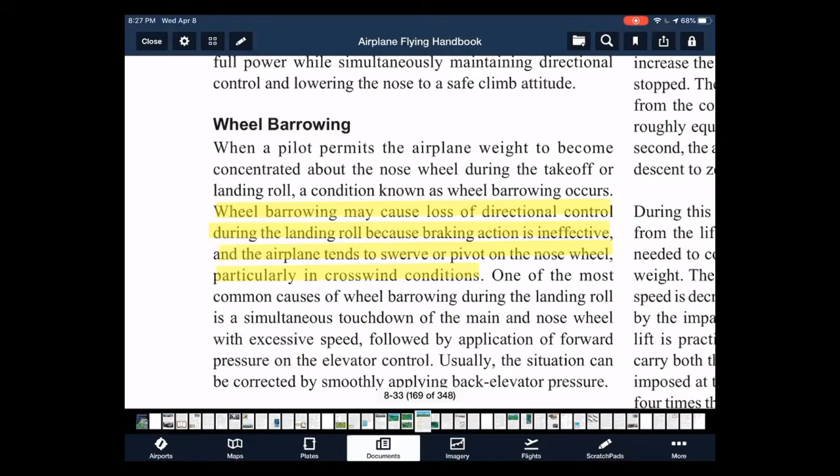Let's read that highlighted area. Wheelbarrowing may cause loss of directional control during the landing roll because braking action is ineffective. You don't have brakes, and the airplane tends to swerve or pivot on the nose wheel, particularly in crosswind conditions. The airplane wants to weather vane into the wind, and since it's pivoting on its nose wheel, it's going to do so much more aggressively than it would do otherwise.

So what do you do in that situation? Well, you've got to get the airplane off the nose wheel. How do you do that? By increasing the angle of attack. The complication is you may be going so fast that as you increase the angle of attack to raise the nose and lower the mains, you may start to fly off the runway.

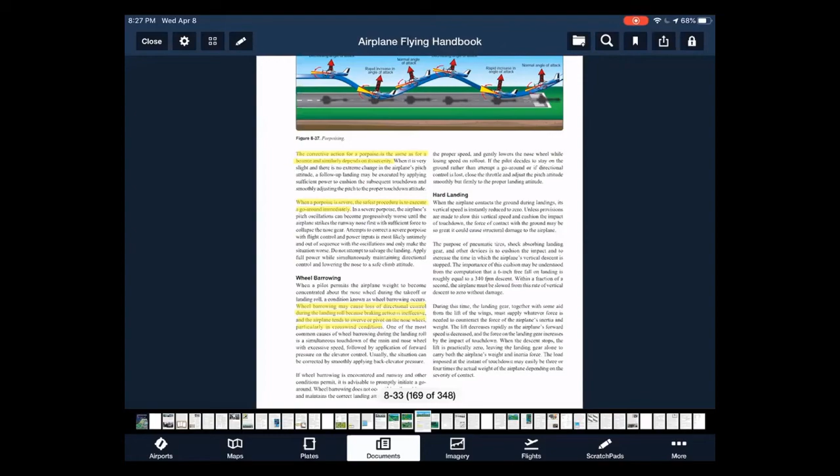So if you didn't already guess it, a go-around would be the most prudent solution. Once again, the AFH says that's a good idea. If it's not an option, because you're so much on the nose wheel, you could close the throttle and pull back on the flight controls to get the airplane back in an appropriate attitude.

To avoid this, as we've talked about, these are situations where it almost takes deftness of control to properly respond to them. When in doubt, the go-around is your best solution, because we can't really go out and simulate these safely. The only real way to get awareness across is to discuss them, and therefore we can't do a whole lot of practice. So the go-around, once again, is your best option.

I think everybody has an idea why hard landings are a concern. The exact opposite, actually, I want to emphasize is the importance of don't be afraid of maybe not what we call a hard landing, but a firm landing. We all like to judge each other, because that's one of the easiest ways to judge, especially for a non-pilot, is how soft the touchdown is. But let's talk about a soft touchdown.

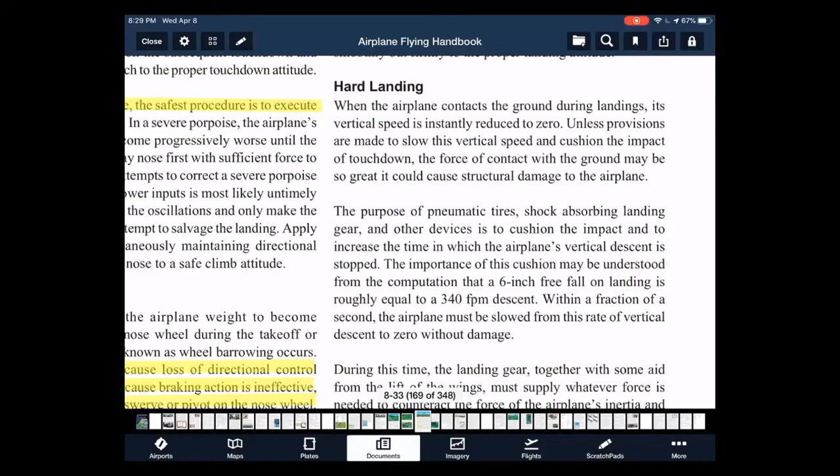A soft touchdown occurs when you've perfectly varied - remember when we were talking about the coefficient of lift compared to the velocity of the airplane? What you've really done in that situation, if you've had a soft touchdown, is the weight of the airplane is so perfectly distributed to the lift of the airplane that they're pretty much exactly in sync in that moment, so that when you touch, weight and lift are in sync with each other, so that any increase in lift may cause the airplane to actually balloon back away from the runway.

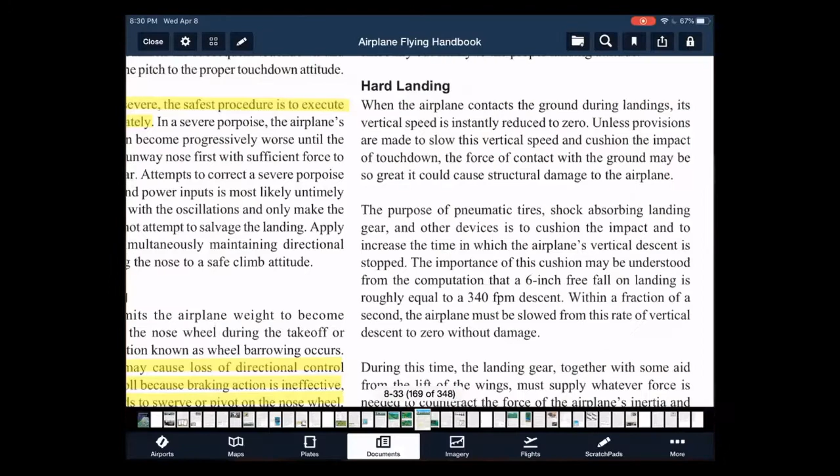I usually teach that in gusty wind situations, a soft landing is not really what you're looking for. You want to put the airplane on the ground and know it's not going to come back off the ground. So you want to stall the airplane in. That comes back to the idea that we stall the airplane in with an appropriate attitude. So we do want a hard landing, but we want a hard landing at the appropriate distance.

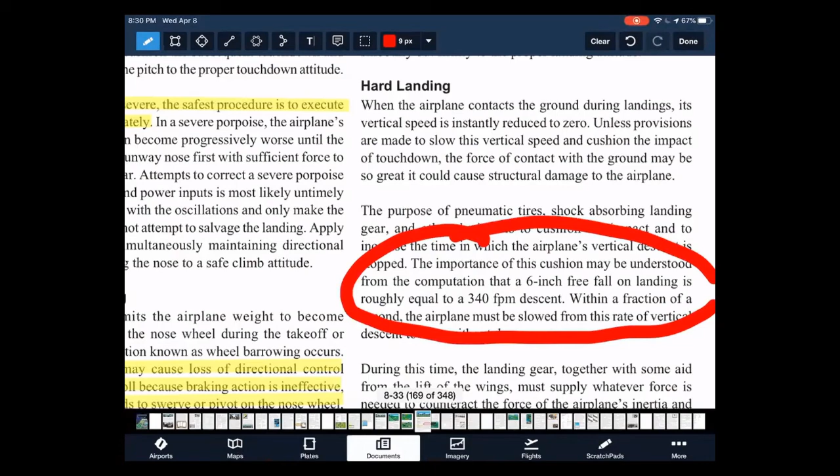It's no surprise the AFH talks about the importance of this cushion. It may be understood from the computation that a 6-inch free fall on a landing is roughly equal to 340 feet per minute descent. If you think about that, that's still fairly significant, but you're not hurting the airplane. So don't be afraid of stalling the airplane in on the mains, and don't think it's a failure.

I would specifically say when you have a good firm landing on the mains, nose well up, and you're properly aligned over the center of the runway, that's pretty much exactly what we're looking for. Can you make soft landings and get a golf clap from your instructor and everyone else? Certainly, but don't think it's a failure when you make a good firm landing on the mains.

As I said before, what that tells you in gusty wind situations especially is the airplane is not ready to fly again. So if you have a sudden shift in wind where you get an increase in headwind, you should not have a surprise where the airplane suddenly wants to climb back off the runway because of how close you are in your lift to weight distribution.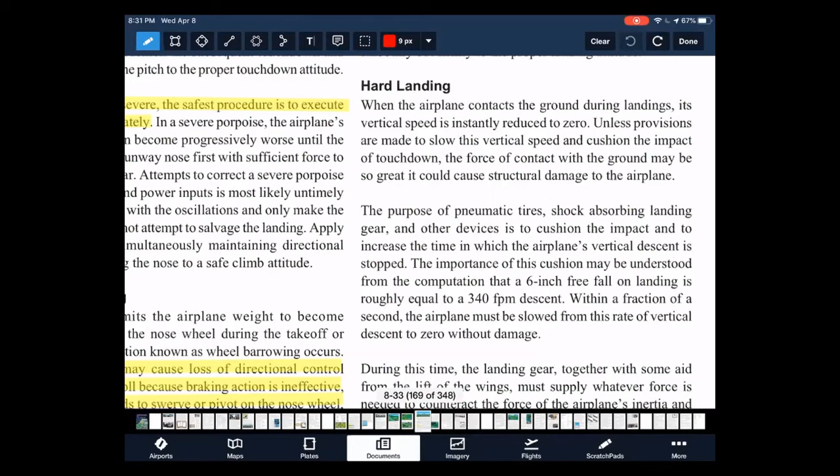That being said, of course, we do want to be aware of high altitude free falls and the damage that it can incur. I'm not going to go into the details about that, because I think everyone has a good idea that they would want to avoid that.

The key takeaway with this situation, once again, is we want that hand on the throttle, but remember to keep your body loose so that you can aptly respond to these situations. If you have a sudden increase in sink rate that leads to a situation where you're likely to impact the ground hard, even in a nose-up attitude, don't hesitate to utilize the power. The power can be utilized to arrest the descent, but more importantly, you can be ready to go around.

I see a lot of stiffness of control when people are struggling with landings. You want to always try to remind yourself on every approach to keep your body loose, because in hard landing situations, it wasn't for a lack of intention for the pilot. It's usually a lack of response, or more specifically, a timely response. And timeliness comes back to being able to be relaxed enough to apply those control inputs quickly.

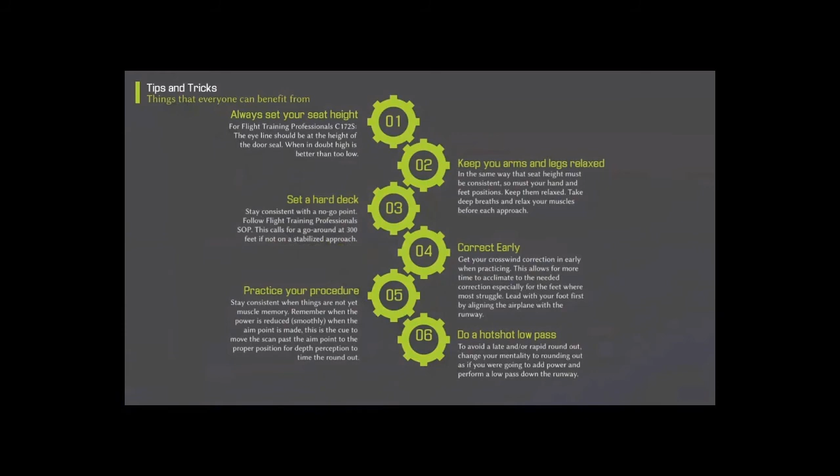So we're going to talk real quick about touchdown in a drift or crab. We're going to talk about the wing rising after touchdown. I'll mention what a ground loop is, but not talk about it too much. Those are my tips and tricks, which we'll finish with here in just a second, but let's jump back one more time to the Airplane Flying Handbook and see what we have to say about those sections.

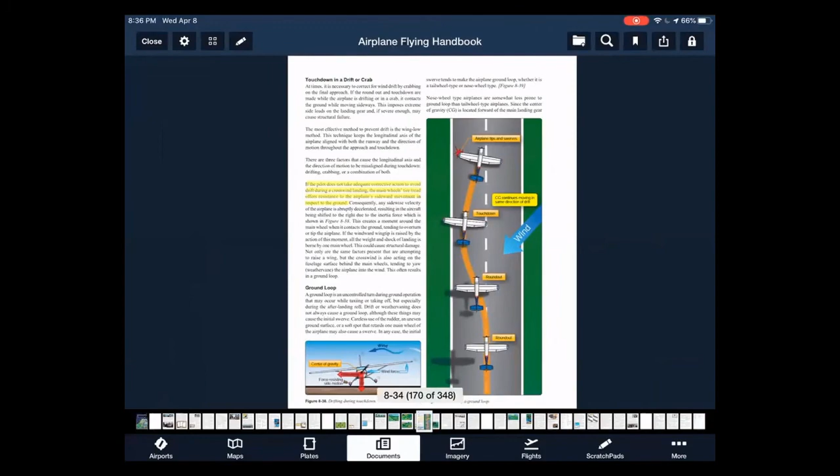Okay, so touchdown in a drift or crab. Most of y'all have probably seen this at some point in your flight training or flying experience. What is, in my opinion, the most common reason across the board for people touching down in a drift? I don't think it's for a lack of skill. Skill is definitely something to be said, but I think it's usually more distraction. So what do I mean by that? I mean the distraction of all the other things we just got through talking about.

You're focused on timing the round out. You're focused on maintaining your airspeed. You're focused on looking down the runway or reducing the power by walking it back smoothly so you don't increase the sink rate of the airplane. Or more specifically, most commonly, you're focused on timing the round out and the flare, and you become so focused on that that when you touch down, you're like, hey, the center line's over off my right-hand side. It was in between my legs just a moment ago. That's what I mean by distraction.

It's the inability to divide your attention readily between everything going on at the same time. Now, there's a limit to that, especially in stronger winds. Most people will begin to, without enough experience and ability, struggle with the proper control inputs, in this case, namely the proper aileron and rudder inputs.

So how do you solve for this? I would recommend, if you haven't already done so - I referred to it before - do some slow flight down the runway. Intentionally go out when there's a direct crosswind with your instructor. Even if you're a licensed pilot, if you don't have confidence when it comes to crosswinds, do some slow flight down the runway, practicing correcting for the wind.

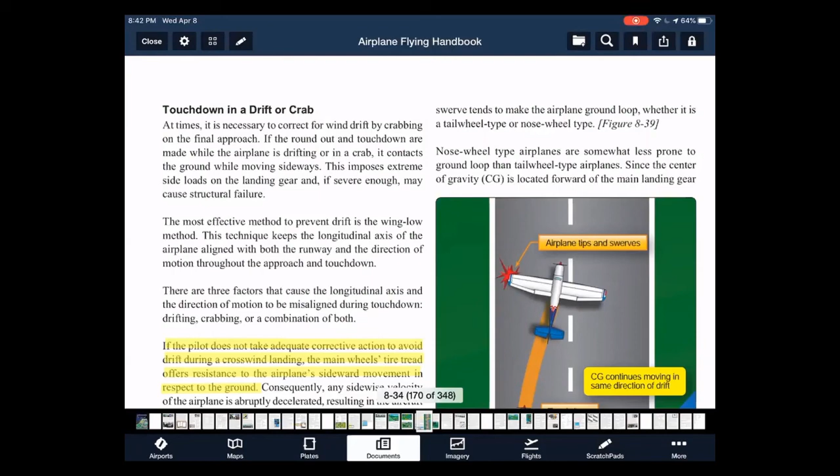And clearly it just demonstrates good airmanship. If once again we're evaluating someone's abilities, if they intend to land in the middle of the runway, then that's where we should land.

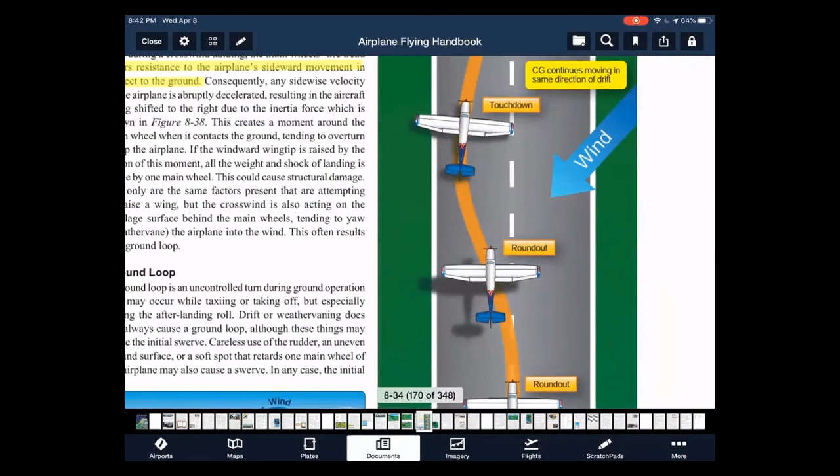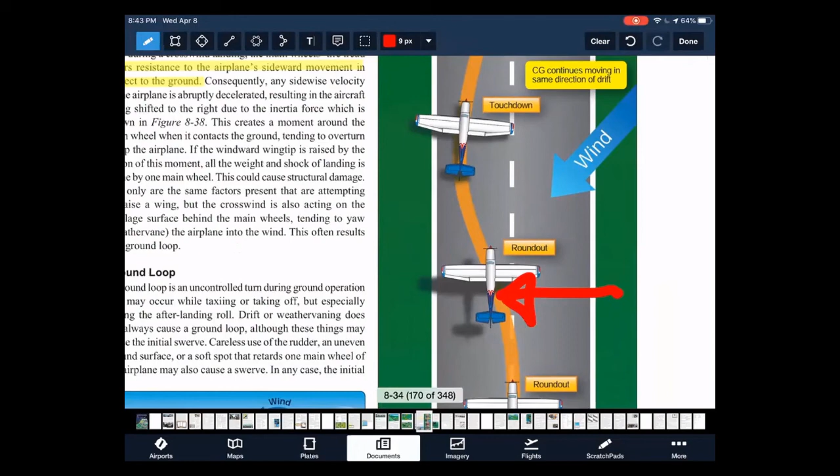The AFH says, in the highlighted area, if the pilot does not take adequate corrective action to avoid drift during a crosswind landing, the main wheel's tire tread offers resistance to the airplane's sideward movement with respect to the ground. This can consequently lead to this situation we see here, which is a ground loop - but we wouldn't necessarily even get to that. As you touch down in a side drift, as the airplane is drifting this direction, the tires will grip the runway and cause a shift in the load of the airplane, and the airplane begins to pull this direction.

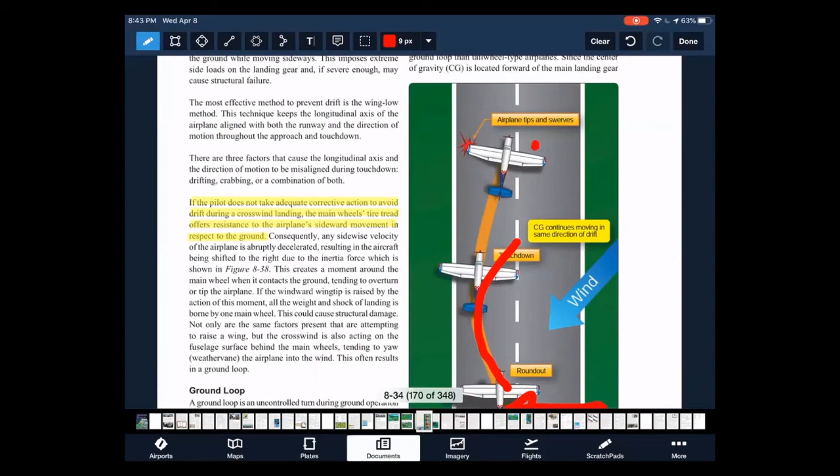If it really gets bad, the airplane can, because of its momentum - think about a top-heavy airplane, which of course in a high-wing airplane we are - the weight of the airplane will actually cause the airplane possibly to tip, and that's what they're showing us here: a possible wing strike in association. So there's a multitude of concerns that go even well beyond your basic light side drift of wearing out the tires. So clearly we don't want this.

The corrective action in this type of situation, if it's bad enough, is, you guessed it, go around. But what if it's not so bad? Well, this is the other problem that I oftentimes see - the ability to change your mindset. That's admittedly one of the harder things about this in a crosswind situation: we take an airplane and use a certain amount of control inputs prior to touchdown, and suddenly those change.

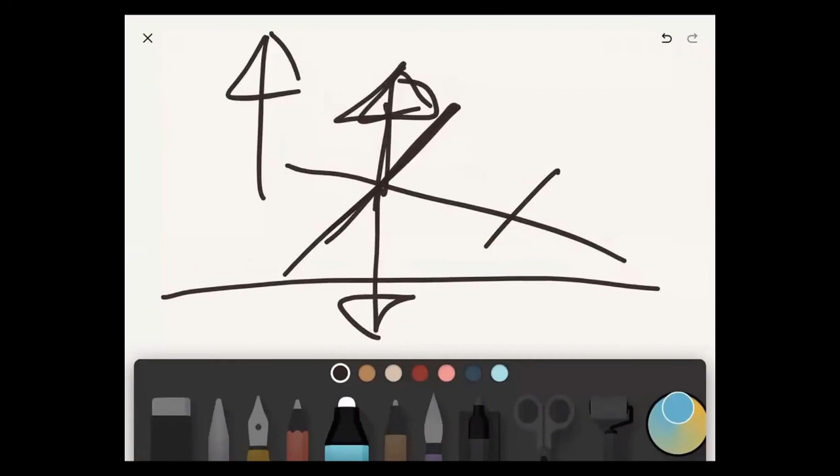Namely, when we're in the round out and the flare, we're using our rudder for alignment, and we're using our ailerons for position. But suddenly when you touch down, those almost reverse. So this is in the air. Now suddenly you've got to change your mindset that when you touch on the ground, the rudder now is used for directional control.

Or you could also say technically position, and the ailerons are for stability, for the crosswind. So you have to reverse your mindset. And especially if you haven't had a lot of experience using your feet, this can become complicated.

So the response, especially if you touch down in a side drift, is to avoid the further complication we'll talk about here in a moment, which is a wing rising during rollout. The way we avoid that is we've got to continue to deflect the aileron into the wind. When in doubt, go nearly full deflection if it's bad enough. But certainly as we slow, we know that we will need more deflection to increase the control response, or in other words, to correct for the crosswind that might otherwise lift the wing.

When in doubt, go around. Otherwise, as a rule of thumb, what you should be doing anyways would be increasing the aileron deflection and keeping the nose straight initially, because the airplane is going to tend to weather vane into the wind.

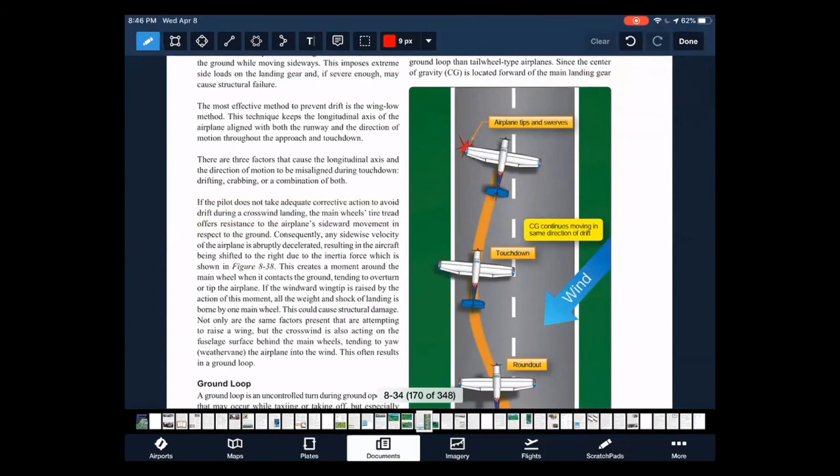So if you start to see the airplane swerve, again, your best solution in most cases, at least at faster speeds, is to go around. And I would say that the earlier you do this, the better off you're going to be.

Okay, so what about a wing rising during a rollout or after touchdown? This usually occurs, of course, because the upwind wing, or in other words, the wing on the crosswind side, is lifted by the wind on that side. As soon as it lifts, the angle of attack increases.

And if it increases, of course, in angle of attack, what's going to happen? The lift is increased. So it doesn't get better. It actually gets worse without pilot response. This all usually happens because either A, we didn't apply enough control input in that direction.

If the airplane were to veer to one side or the other and we inappropriately correct with the ailerons, let's say that, for example, we drift to the right in this case instead of what's visualized here to the left. Let me quickly illustrate that.

So if the airplane begins drifting this direction after touchdown, maybe because of wind, or maybe in combination because we haven't fully put the weight of the airplane down on the runway, maybe we're misaligned directionally, whatever the reason. And let's say as the airplane drifts this direction, we habitually respond incorrectly with left aileron instead of left rudder.

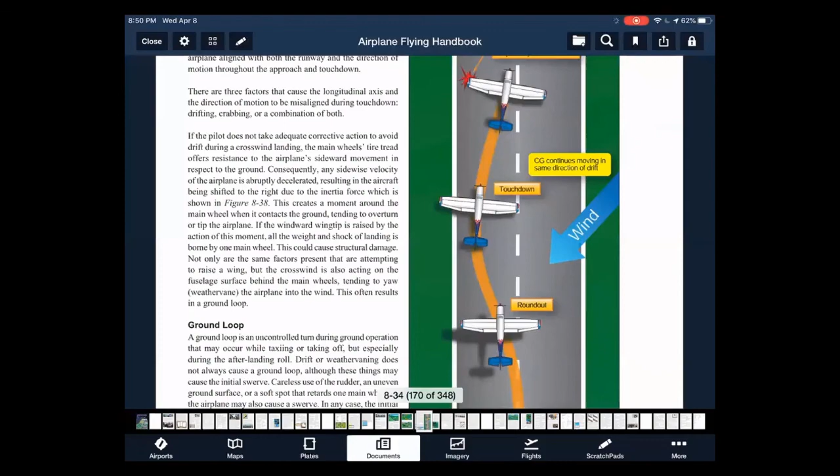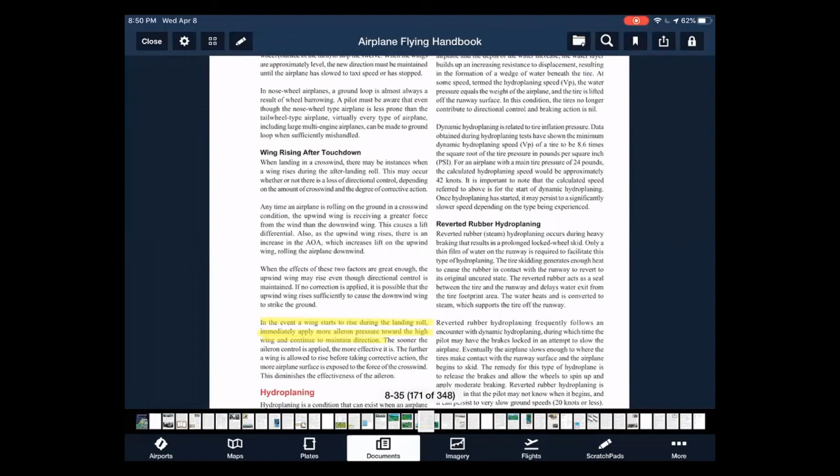Okay, that's it. So let's just take a look real quick. I'll finally let y'all go. I guess I'm actually on time, which is surprising. Let's take a look at a couple of tips and tricks that I recommend. These aren't absolutes. You won't necessarily find these anywhere in the airplane flying handbook or anything like that. You will see some of these certainly emphasized at the school, however. So let's just talk about them together.

I always recommend, in fact this is not a recommendation, this is just straight up requirement: if you get out of the habit or you've forgotten about it or you're not emphasizing it to yourself enough, make sure you're always setting your seat height before every single flight. The seat height position is absolutely key for proper sight picture. This could be creating some problems specifically with roundouts, rounding out improperly.

So generally speaking, the eye line as you look should be in line with the door seal. When in doubt, however, it's better to be high than too low. In other words, if you sit too low on the seat, that's kind of the worst case scenario. It really messes up sight picture for proper round out and flare.

Two, I talked about this before. If anyone is stiff on the controls, and you may not even recognize this, if you haven't had this conversation with your instructor, ask them: do I look like I'm iron gripping the controls? How do my legs look? How does my forearm and my bicep look? If you're stiff on the controls, get your body relaxed. Easier said than done, I know, because you want to make a good landing, so that becomes a little bit agitating. But even taking some deep breaths, maybe as a standard operating procedure on base, 3 deep breaths.